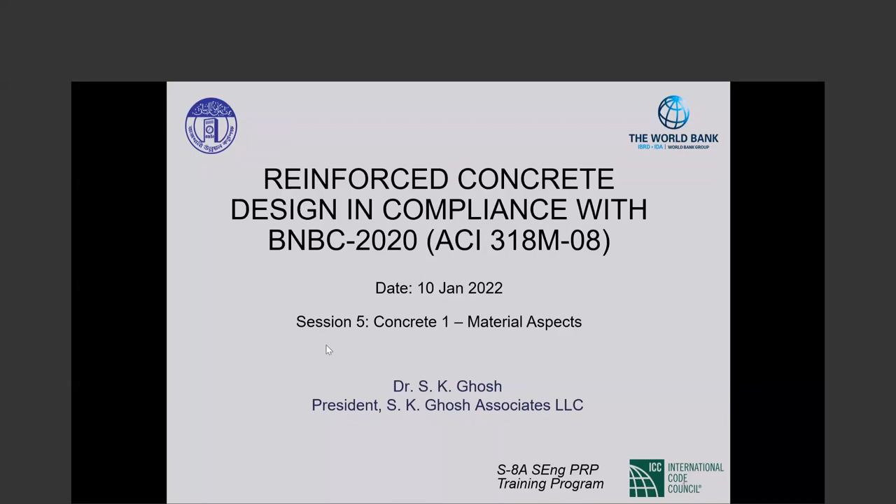Good evening once again. It's 8:05, so let us start. Bodhi has already provided a bit of an introduction, so I'll go forward. He pointed out that the date is 11th of January, not 10th. We had to make some adjustments at the beginning of the program because of circumstances beyond our control. Today is the sixth offering in the series, and we are starting with our reinforced concrete courses. Today is a two-part course. I'll talk about the material aspects of concrete and then go on to strength design, the principles of strength design, what it is that we do when we do strength design of concrete.

The ingredients of concrete, as you all know, are cement, sand, stone, and water. Those are the basic ingredients. But for a long time now, we also have admixtures in concrete. Admixtures used to be classified as mineral admixtures and chemical admixtures. Mineral admixtures will be something like blast furnace slag or fly ash. Those are now called supplemental cementitious materials, and the chemical admixtures are called admixtures. Cement plus the supplemental cementitious materials are called just cementitious materials. So what used to be water to cement ratio today is water to cementitious materials ratio. However, the code we are talking about, BNBC 2020, as pointed out earlier, is based on ACI 318-08.

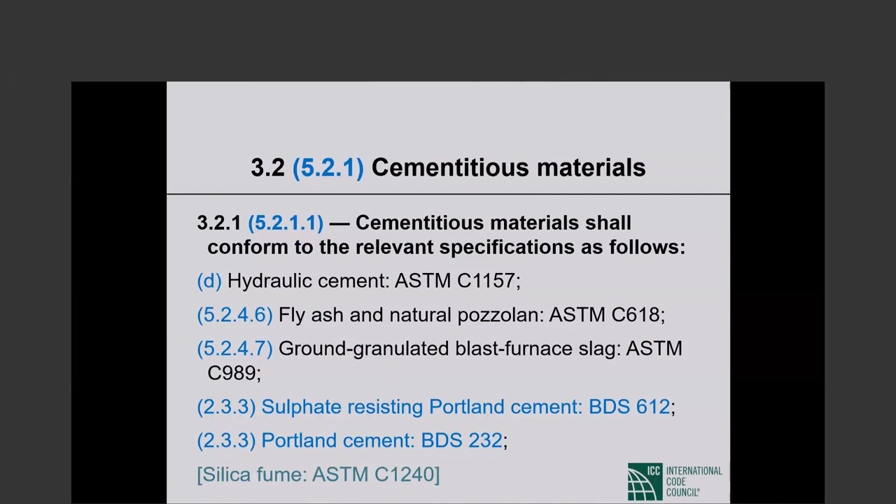To go back for a second, as I said, basically all cement sold is BDS 197-1, but it is tested for compliance with ASTM C150. When tested, BDS 197-1 cement is found to comply with ASTM C150. That's pretty much the situation as I understand it. So: Portland cement, then blended hydraulic cement C595, hydraulic cement C1157, and the mineral admixtures, among which fly ash, natural pozzolans, and ground granulated blast furnace slag. This is what we are dealing with for concrete making.

The BDS 197 cement comes theoretically at least in 5 varieties. CEM 1 is Portland cement, CEM 2 is Portland composite cement, CEM 3 blast furnace cement, CEM 4 pozzolanic cement, and CEM 5 composite cement, meaning cement and pozzolan together. Now, Dr. Akif tells me that pretty much all cement used is CEM 1 and CEM 2. CEM 3 has been used in nuclear power plants, and CEM 4 and 5 are basically not used.

C150 Portland cement is the American standard followed throughout the United States and in some parts of the world. C150 cement comes in 5 types: type 1, type 2, type 3, type 4, type 5. Type 1 is normal, type 2 is moderate sulfate resistant, very important - if there is sulfate in the soil, you may want to go for type 2 cement. Type 3 is high early strength - I think the name tells you what it is.

Type 4 is low heat of hydration. As cement reacts chemically with water, there is heat generated, and that may cause problems depending upon what you are doing, how you are curing the concrete, and so forth. So in many applications like mass concrete, low heat of hydration may be an attraction. And then type 5 is high sulfate resistance - when type 2 Portland cement won't do, you need type 5, cement with high sulfate resistance.

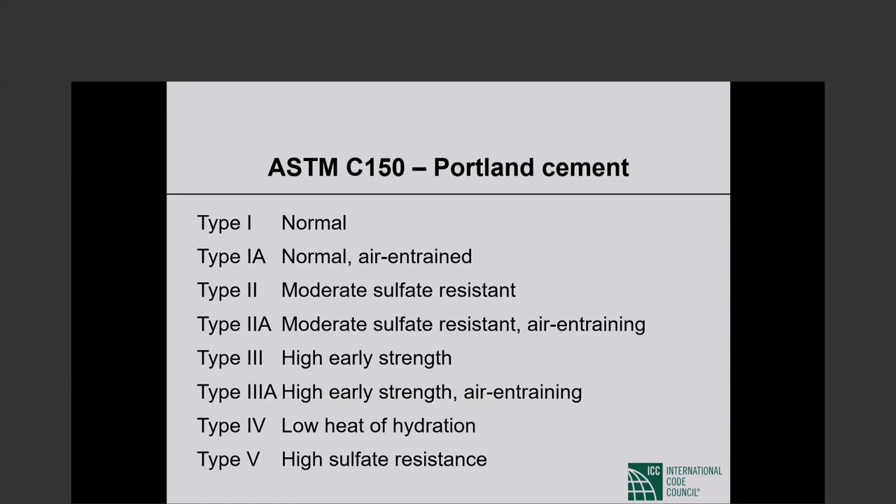And then for types 1, 2, and 3, there is air entrained cement. Entrainment of air in the cement is for freeze-thaw resistance. You do not have that problem in Bangladesh, but in much of the US, the entire northern part, concrete freezes and then thaws and then freezes again. That causes a lot of damage. To alleviate that damage, air is intentionally entrained in concrete, typically by adding air entraining admixtures to the concrete mix, but sometimes air is entrained in the cement itself at the cement plant, giving us type 1A, type 2A, and type 3A Portland cements. You don't have to worry about air entrainment to the best of my knowledge.

The blended cements C595: that is type 1S, which is Portland blast furnace slag cement, and 1P, Portland pozzolan cement. If you have 1S parenthesis 50, that means the blended cement contains 50% slag by mass. And if it is a 1P cement, then within parentheses you may have A for air entraining, MS for moderate sulfate resistant, and so forth. So C595 blended cement is type 1S or 1P with additional information conveyed through the labeling.

1157 hydraulic cements, this is relatively new. C150 goes back a long way, then came 595, and then 1157 is relatively recent.

This is also called performance spec, meaning the ingredients and so forth are not pinned down, but what properties the cement will deliver is emphasized. So hydraulic cement C1157 can be type GU, general use, HE, high early strength, MS, moderate sulfate resistant, HS, high sulfate resistant, MH, moderate heat of hydration, LH, low heat of hydration. So this kind of mirrors the varieties of C150 Portland cement that we have.

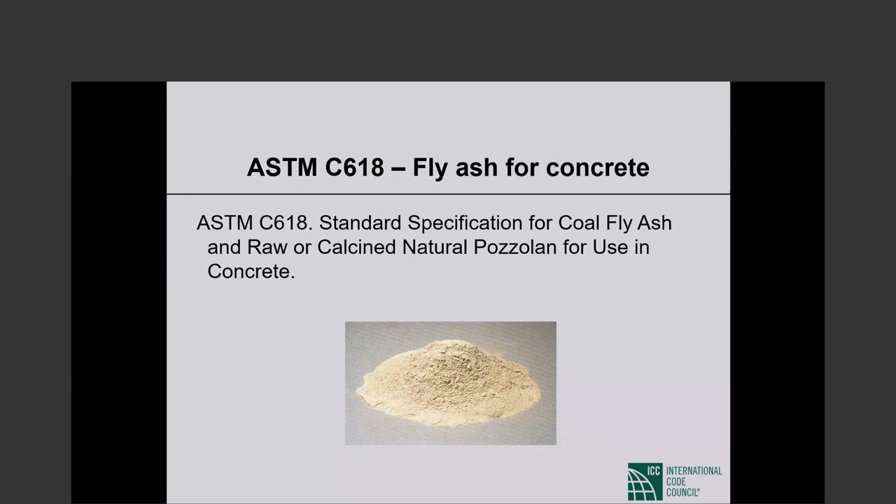The ASTM spec—so the fly ash that you use must comply with ASTM C618. That is the ASTM spec for coal fly ash and raw or calcined natural pozzolan for use in concrete. So C618 for fly ash.

Ground granulated blast furnace slag, that again is a pretty popular mineral admixture or supplemental cementitious material. The applicable ASTM standard is C989, standard specification for slag cement for use in concrete and mortars.

Now, this is not citing a standard, and this is a requirement in all the slides. The section numbers in black are ACI 318-08 section numbers. The section numbers in blue are BNBC 2020 section numbers.

Both documents tell you cementitious materials used in the work, meaning the project, shall correspond to those used as the basis for selecting concrete mixture proportions. So you proportion your mix assuming that you are going to use certain supplemental cementitious materials. On the project, you have to use exactly those materials, not something close to those. I think this is understandable upon reading, but this is very, very important.

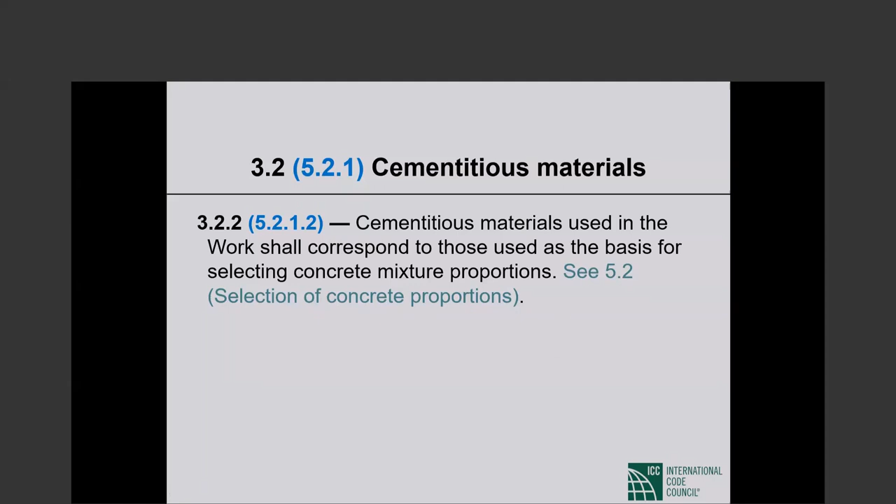Whenever we have on the slide text in this color, that means it is ACI 318 text that does not appear in BNBC 2020.

We go from cement to aggregate. Concrete aggregate shall conform to one of the following specifications. BNBC 2020 says coarse and fine aggregate shall comply with BDS 243—coarse and fine aggregate from natural source for concrete, BDS 243.

The US specification for normal weight aggregate is C33, and for lightweight aggregate it is C330. So C33 is normal weight aggregate, C330 is lightweight.

BNBC has an exception that reads: aggregates that have been shown by special test or actual service to produce concrete of adequate strength and durability, and approved by the building official, do not have to comply with ASTM C330. In other words, you may use lightweight aggregate that is not in compliance with C330 if, as the exception says, it has been shown by special test or actual service to produce concrete of adequate strength and durability, and it has been approved by the building official.

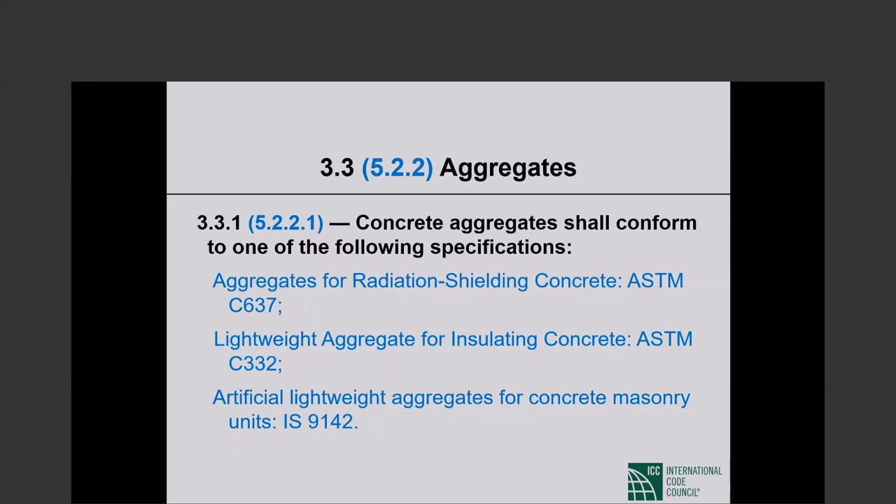This is not an ASTM. So those are cited by BNBC 2020, but not ACI 318. I realize that this is not exciting stuff, but these things are important. All the ingredients of concrete have to comply with applicable standards and specifications.

The next slide also has something extremely important: nominal maximum size of coarse aggregate shall not be larger than... Nominal maximum size—nominal means it is not the measured number, it is what it is claimed to be. So nominal 3/4 inch aggregate may be smaller when you actually measure it in size.

A nominal maximum size of coarse aggregate shall not be larger than 1/5 the narrowest dimension between sides of forms, 1/3 the depth of slab, and 3/4 the minimum clear spacing between individual reinforcing bars or wires, bundles of bars, individual tendons, bundle tendons, or ducts. Tendon would be pre-stressing steel strand, things of that kind.

The whole purpose of this is that concrete can be placed so that there will not be voids in the completed structural member. This is extremely important. If your stone pieces are too big, then voids may very well be created in the concrete because the concrete does not flow—it does not fill all the gaps that need to be filled. So 1/5 the narrowest dimension, etc. You can read this. This is extremely important. You cannot always use large aggregate, obviously.

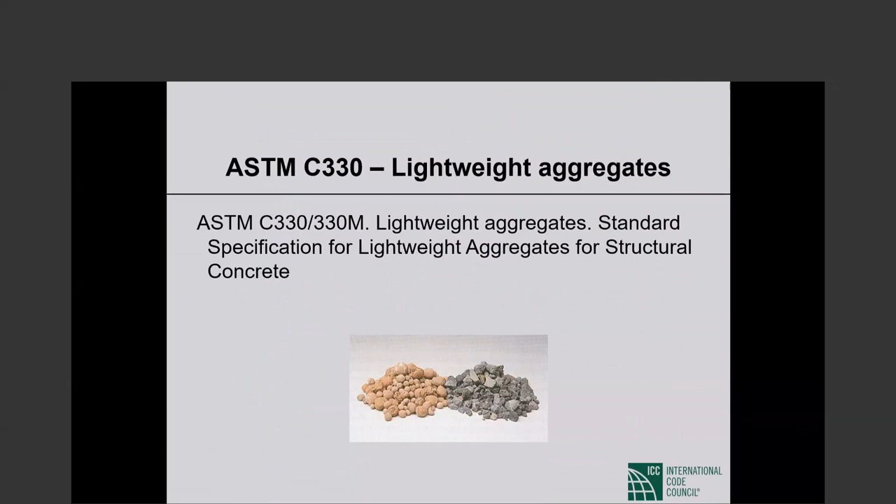C330 is the standard or specification for lightweight aggregate. The title is Standard Specification for Lightweight Aggregates for Structural Concrete.

Mixing water for concrete is more important than anyone would think. I would say extremely important that the water used in mixing concrete be non-problematic water. We now have an ASTM C1602, which is relatively new. I haven't checked, but I suspect when ACI 318-08 came out, that specification was simply not available.

So that is not cited in BNBC 2020. BNBC 2020 says mixing water for pre-stressed concrete, or for concrete that will contain aluminum embedments, includes that portion of mixing water contributed in the form of free moisture on aggregates.

So free moisture on aggregates shall count as mixing water. That is important. Mixing water shall not contain deleterious amounts of chloride ion, and how much is deleterious is given in both BNBC and ACI 318-08. For that, you have to go to section 553. So mixing water for pre-stressed concrete shall not contain deleterious amounts of chloride ion - this is the important part.

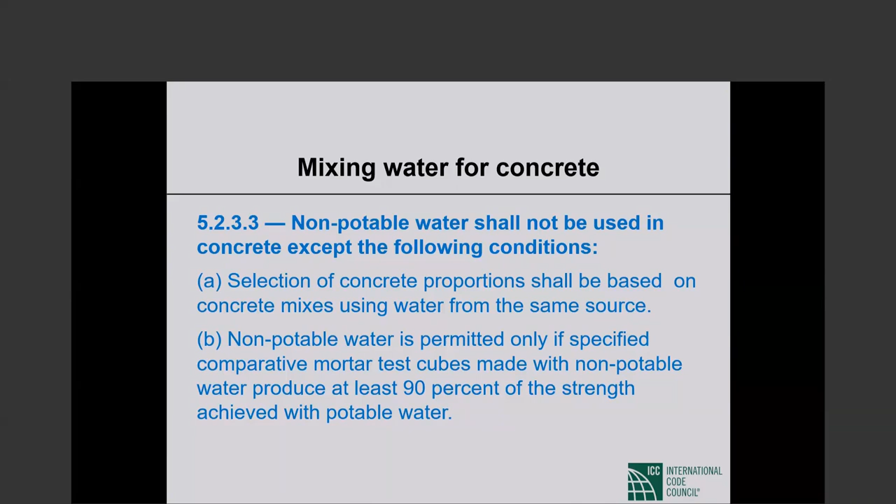Now, what is on this slide I would emphasize is extremely important, and item A is also important: selection of concrete proportion shall be based on concrete mixes using water from the same source.

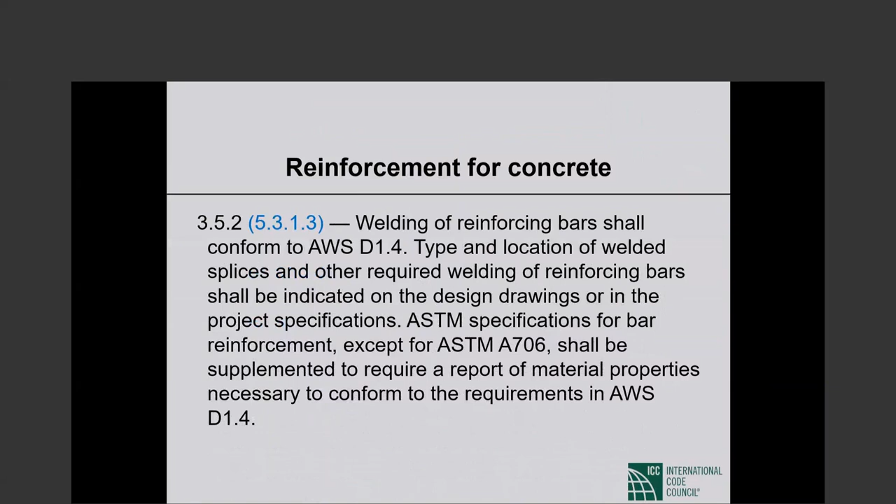Now we go on to reinforcement for concrete. The first item is not reinforcement itself, but welding of reinforcement. Welding of reinforcing bars shall conform to AWS, American Welding Society, D1.4. I think the rest of it I will let you read - it gets a little too much.

Anyway, deformed reinforcement - that's what we always basically use. There used to be plain reinforcement a long time ago, but that has now been discontinued for quite a while. So all reinforcement is deformed reinforcement. The deformations are those ribs that you see on reinforcing bars. It is also called ribbed bars, the deformed bars.

So deformed reinforcing bars shall conform to the requirements for deformed bars in one of the following specifications. The specifications in Bangladesh are BDS 6935-1 and BDS 6935-2. -1 is plain bars, so those are not used. -2 are deformed bars, those are the ones used. So just as I remarked about cement, about reinforcement, basically all reinforcement used in Bangladesh, I understand, is BDS 6935-2.

Now in the US, the vast majority of reinforcement is ASTM A615, but particularly in seismic applications, and I would say increasingly, we have A706 reinforcement. The difference between the two: A706 is weldable reinforcement, A615 is not. A615 reinforcement requires special treatment if we are going to weld it. The ingredients of A706 are also tied down much more strictly than those of ASTM A615. So ASTM A615 is standard billet steel, and A706 is weldable reinforcement.

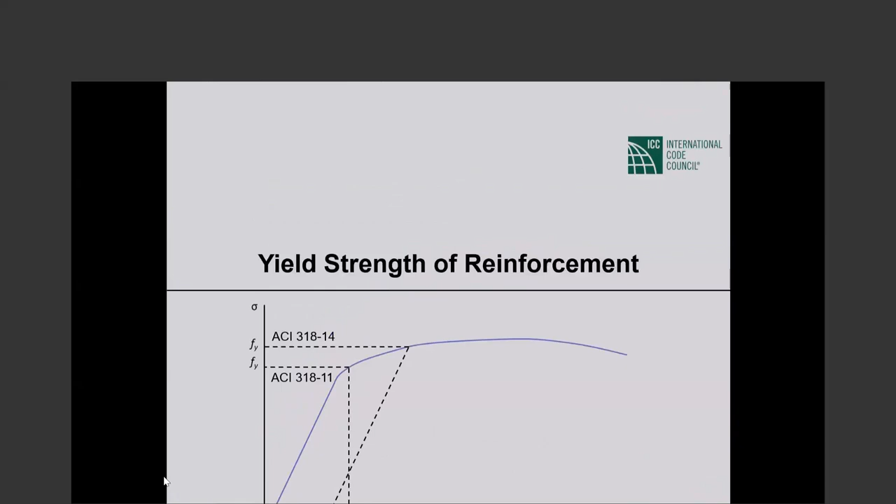So when the yield strength exceeds 60 ksi, the yield strength shall be taken as the stress corresponding to a strain of 0.35%. This change of definition of yield strength becomes important in certain applications, and it may come up in later discussions, but that is not the subject today. However, I do want to point out that this change of definition is made. Yield strength means different things for reinforcing steel up to 60 ksi yield strength and reinforcing steel with yield strength larger than 60 ksi.

Then, in addition to bars, there are bar mats for concrete reinforcement. The applicable ASTM standard is A184. When I have M following the standard number, that simply means metric. Reinforcing bars used in bar mats shall conform to 615 or 706, those are the two US specs for reinforcement.

Now we go from bar to wire for reinforcement. So deformed wire for concrete reinforcement shall conform to A496. BNBC says shall not be smaller than size D4. I will talk about wire size on the next slide. Shall not be smaller than size D4, which has a nominal diameter of 5.72 millimeter.

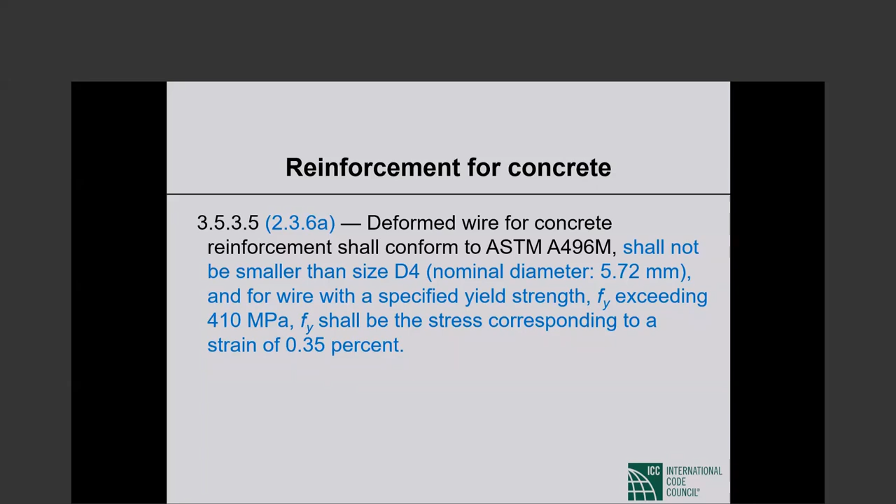Now, wire size, when we say D4, what does it mean? Individual wire size designations are based on the cross-sectional area of a given wire. M stands for metric, W represents plain wire, and D represents deformed wire. The number following the W and the D represents the cross-sectional area of the wire in millimeters square. So D4 means deformed wire having a cross-sectional area of 4 square millimeters. A D10 wire would indicate a deformed wire having a cross-sectional area of 10 square millimeters. So keep that in mind when you come across wire sizes.

Then there is what used to be called welded wire fabric. Now it is called welded wire reinforcement. People who manufacture these do not like the term fabric. Now it is welded wire reinforcement.

So welded wire reinforcement may be made of plain wire or deformed wire. Welded plain wire reinforcement shall conform to ASTM A185, except that for wire with high strength exceeding 60 ksi yield strength, the definition of yield strength changes. Welded intersections shall not be spaced further apart than 300 millimeters, 12 inches, in direction of calculated stress, except for welded wire reinforcement used as stirrups. So there is a maximum spacing between the cross wires, no more than 12 inches.

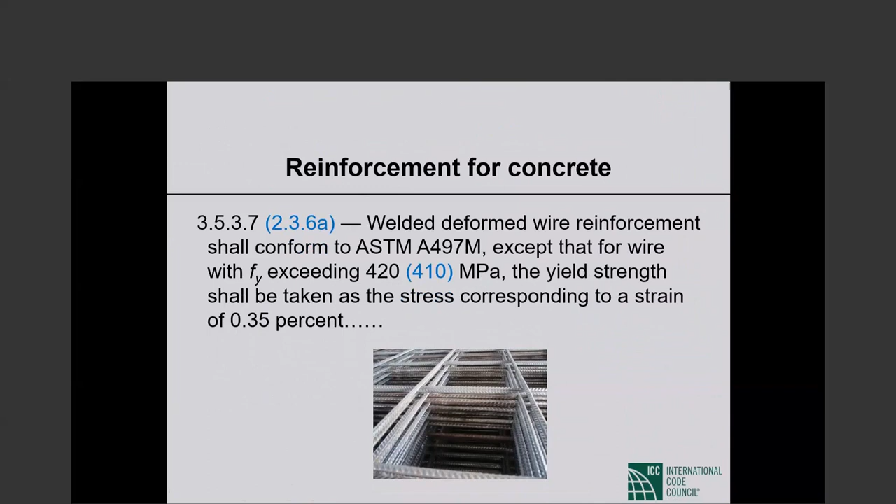Welded deformed wire reinforcement, the spec is A497. Again, the definition of yield strength changes when yield strength exceeds 60 ksi.

Welded intersections shall not be spaced further apart than 400 millimeters. For plain wire reinforcement, the cross wires cannot be further apart than 300 millimeters. For deformed wire, it is 400 millimeters.

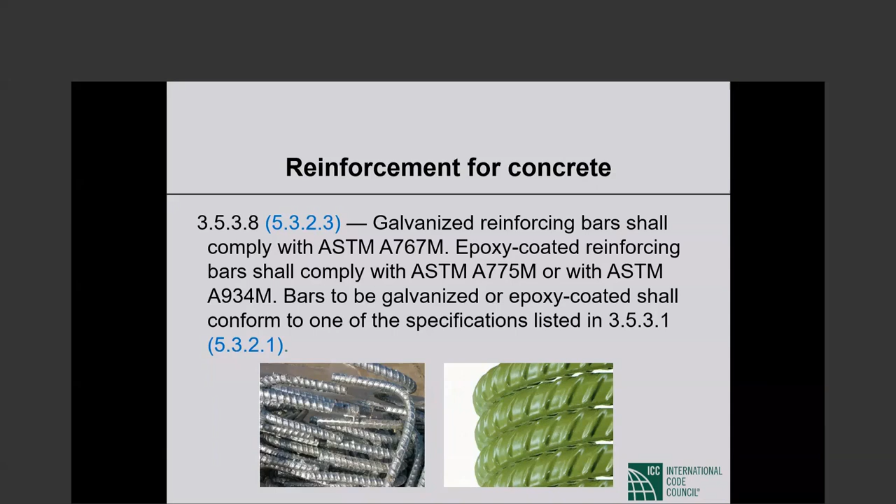Then there is galvanized reinforcing bars, 767. Galvanized means zinc coated, that is protection against corrosion, or epoxy coated reinforcement, A775. Epoxy coated, as I said, is very popular in highway construction for pavements, and in Bangladesh apparently in coastal areas for basements and things, because of the high risk of corrosion.

This language is in ACI 318-08, not in BNBC 2020. I think I'm going to skip it because of that. Okay, but if you have an interest, please read it.

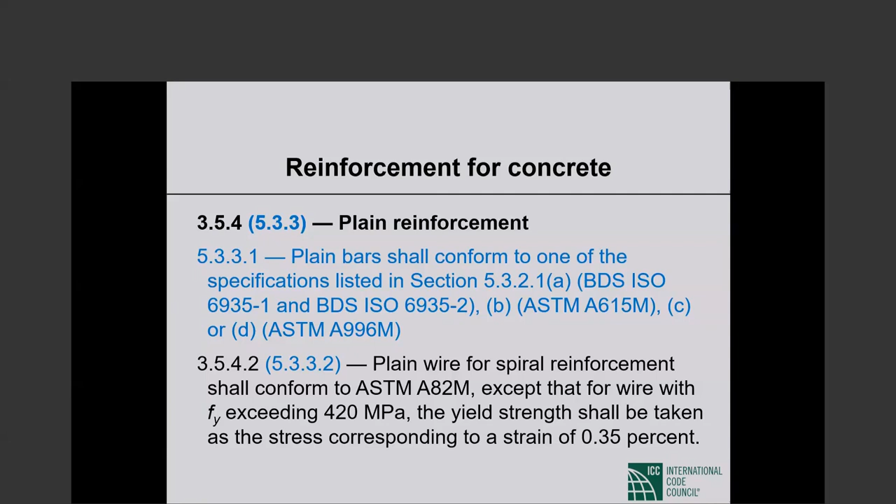Okay, so we come back to reinforcement for concrete, plain reinforcement. You know that it is 6935-1. Plain bars shall conform to 6935-1 as mentioned previously. Plain wire for spiral reinforcement shall conform to ASTM A82, except that for wire with F sub y exceeding... that definition of yield strength change repeats itself.

This is something I will mention because I consider it to be extremely important. At some point, I don't remember which module now, we will talk about flat plate design. Flat plate is a reinforced concrete slab supported directly on columns. There are no column line beams. Also, there is no local thickening of the slab on top of the columns.

Those thickenings are called drop panels. Further, there are no column capitals. The column tops are not flared to give us a larger column area at the top. So it is a slab supported directly on columns without any drop panels or column capitals. In the design of that type of slab, the critical thing is punching shear, two-way shear as opposed to one-way shear, commonly referred to as punching shear.

When punching shear stress is beyond the punching shear stress carrying capacity of the concrete, we use punching shear reinforcement. And the most popular kind are now headed studs.

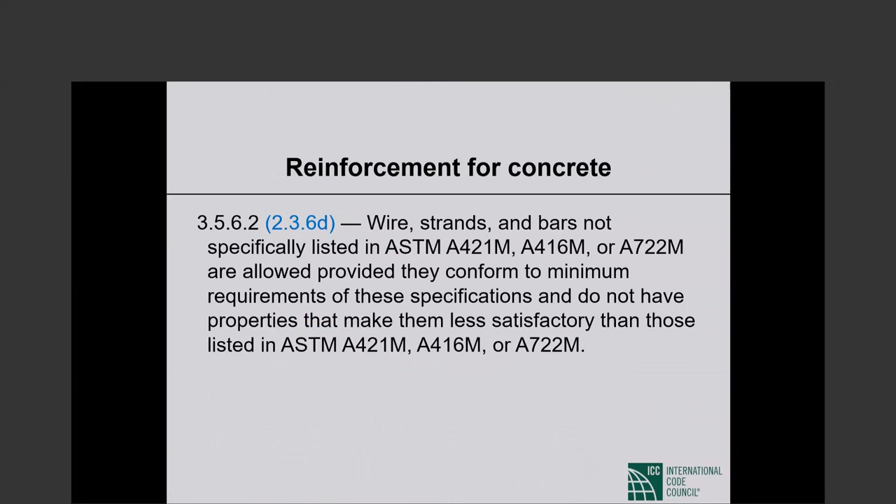Okay, then beyond reinforcing steel and pre-stressing steel, there are times when we use structural steel in concrete, steel pipes, or tubing, and there are specifications given. I don't think I need to or want to take time over those. Those are not common applications, but there are times when you do use structural steel pipe and tubing in concrete. If you do, there are ASTM specs governing their use.

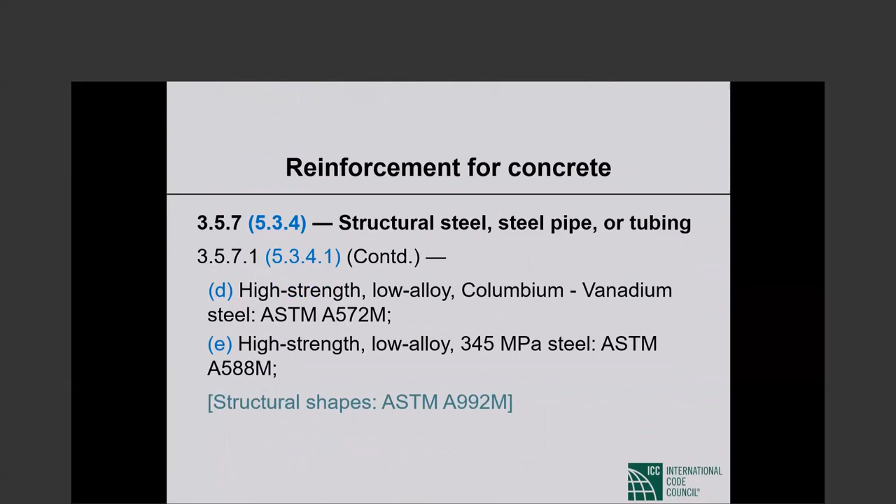Steel discontinuous fiber reinforcement for concrete is recognized in ACI 318 as shear reinforcement under very tight controls. This is an increasingly important item, in my opinion, that you should be aware of - steel discontinuous fiber reinforcement.

Other types of fibers, like carbon fibers, are not recognized by 318. And then there are headed deformed bars.

Normally, to anchor a bar, we hook the bar into the concrete. But if there is a lot of reinforcement, the hooks lead to major congestion. So instead of using hooks...

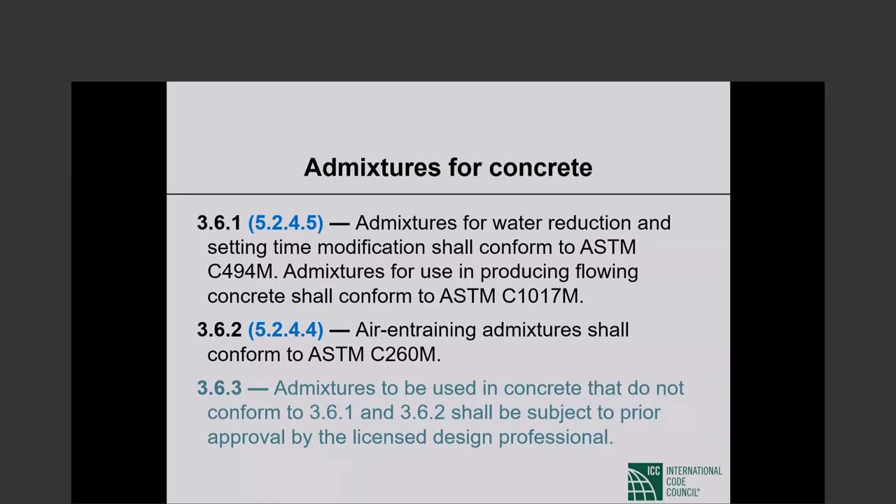Admixtures to be used in concrete shall be subject to prior approval. ACI doesn't require this, but BNBC does - admixtures to be used in concrete shall be subject to prior approval by the licensed design professional and conform to the following standards.

So BDS EN 934-1 or BDS EN 934-2.

Fly ash or other pozzolans - that will not be called admixture today, it's mineral admixture now, supplemental cementitious material. You have already seen the spec is C618. Ground granulated blast furnace slag is also cementitious material.

ASTM C989 - pigment for colored concrete, C979. BNBC cites those under admixtures for concrete.

Calcium chloride or admixtures containing chloride from sources other than impurities in admixture ingredients shall not be used in pre-stressed concrete, in concrete containing embedded aluminum, or in concrete cast against stay-in-place galvanized steel forms.

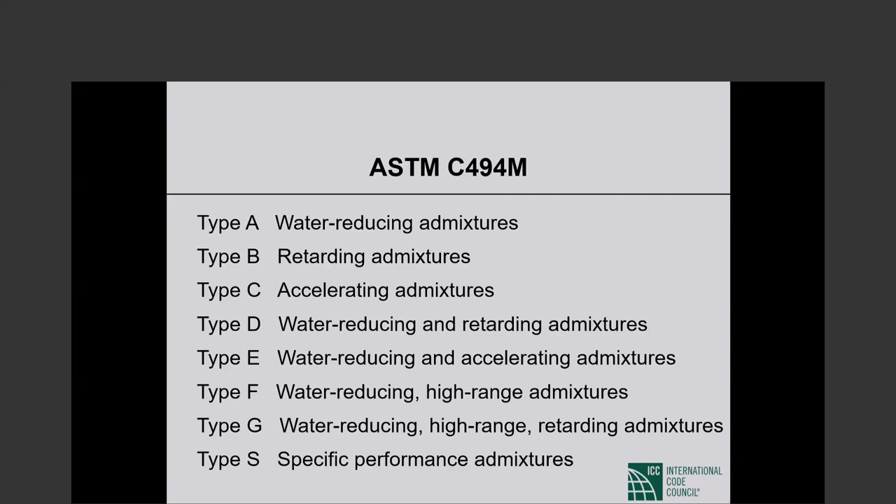High range means it gets close to what was it called, the self-consolidating - there was a flowing, so it gives you kind of flowing concrete. So water reducing high range admixtures, water reducing high range retarding admixtures, and then specific performance admixtures - A, B, C, D, E, F, G, and S, various types of C494 admixtures used.

BNBC cites BDS EN 934-1. Those are admixtures for concrete, mortar, and grout - Part 1 is common requirements. 934-2, admixtures for concrete, mortar, and grout, Part 2 talks about concrete admixture definitions, requirements, conformity, marking, and labeling.

Storage of materials: cementitious materials and aggregates shall be stored in such a manner as to prevent deterioration or intrusion of foreign matter. Storage is extremely important - prevent deterioration and intrusion of foreign matter. These things, when you read them, don't read like much, but these are very, very important requirements.

Durability requirements - again, extremely important. Durability is like longevity in people. How long is your concrete going to last? How long is your concrete going to be serviceable, going to provide you, going to serve the purpose for which the concrete was installed?

So for concrete intended to have low permeability, so-called watertight concrete - for concrete intended to have low permeability when exposed to water, the water cement ratio shall not exceed 0.5.

When we talk about durability, the various aspects of it are typically four: freeze-thaw resistance, which is kind of moot in Bangladesh, so you have three considerations - one is resistance to sulfate attack, second is water tightness or permeability, however you want to describe it, and the third is corrosion protection. So: sulfate resistance, corrosion protection, and permeability or lack of it, impermeability.

Those are the three considerations. BNBC starts with watertight concrete, intended to have low permeability when exposed to water. What you need to do is keep the water-cement ratio—today it would be called water-cementitious materials ratio, and I think that's the way you should practice it because that makes more sense—shall not exceed 0.5. That is a pretty generous number, not a very tight restriction.

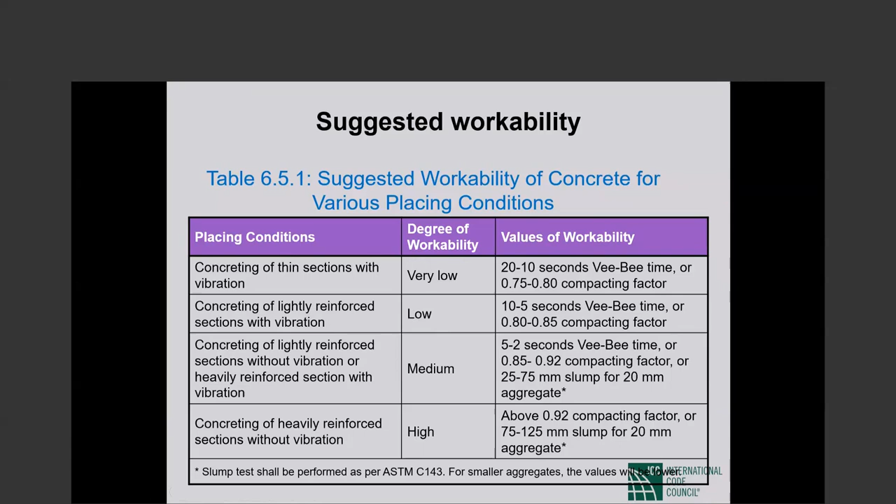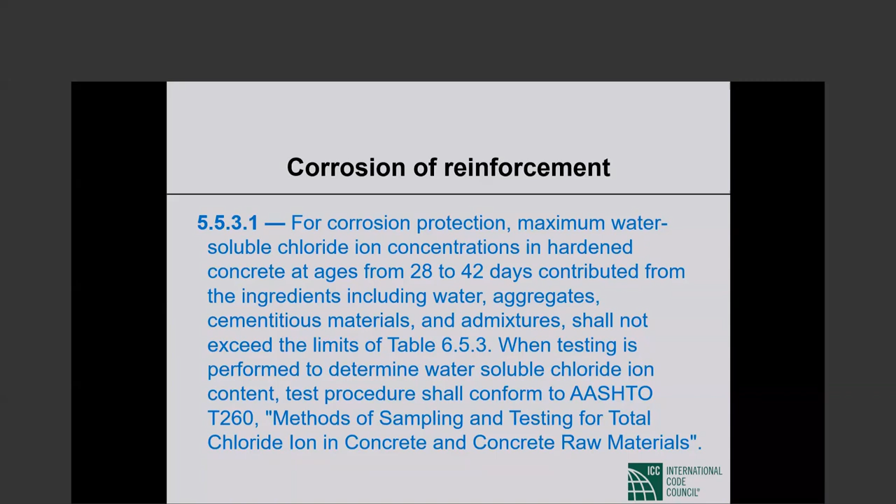When testing is performed to determine water-soluble chloride ion content, the test procedure shall conform to AASHTO T260, which I had in mind when I was talking a minute ago. When reinforced concrete will be exposed to brackish water, seawater, or spray from these sources, the requirements of sections 5511 and 5512—those are the first two things I showed you for water-cement ratio or concrete strength—apply. There is a limitation on water-cement ratio that we went over; you can go back, I'm not going to spend the time.

There is also a minimum cover requirement in section 818, chapter 8, which we will come to. So both are required: the limitation on water-cement ratio and adequate cover on reinforcement. The maximum chloride ion content, as I said, is given in a table—this gives you the maximum chloride ion content depending upon your application.

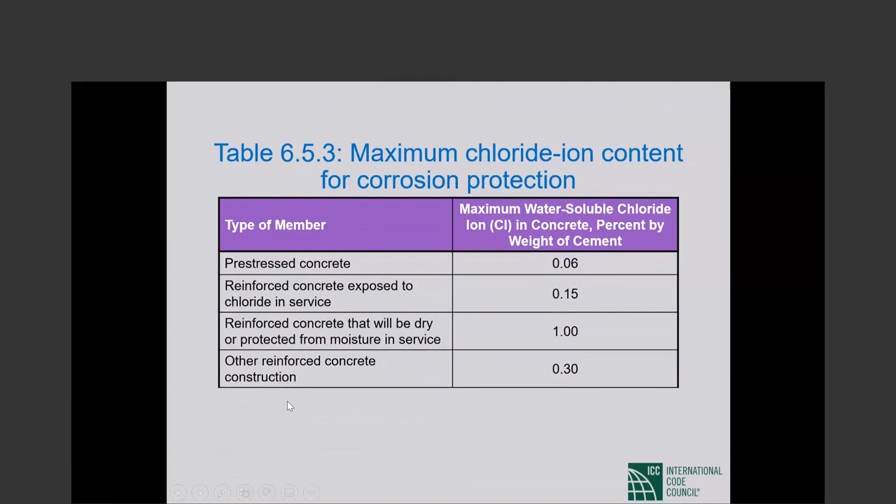The minimum concrete strength that I mentioned, minimum concrete strength for structural use of reinforced concrete, this is not particularly for corrosion protection, this is across the board. Minimum concrete strength for structural use of reinforced concrete in BNBC is 20 megapascal, Newton per square millimeter. 20 is about 3000 psi. However, for buildings up to 4-story, the minimum concrete strength may be relaxed to 17 megapascal, which would be about 2500 psi or so. Okay, so those are very minimum concrete strengths.

In IBC, it is 2500 psi across the board. We don't go up to the 3000 except in some cases.

Corrosive environments. Okay, this is important stuff for Bangladesh, this is why I kept it here. The cover that was being referenced from earlier - if a thickness of cover for corrosive environment or other severe exposure conditions greater than the concrete cover specified in section such and such is required, such greater thickness shall be specified. So there are standard cover requirements in 8171 to 8176. But if thickness of cover for corrosive environments or other severe exposure conditions greater than that is required, then such greater thickness shall be specified.

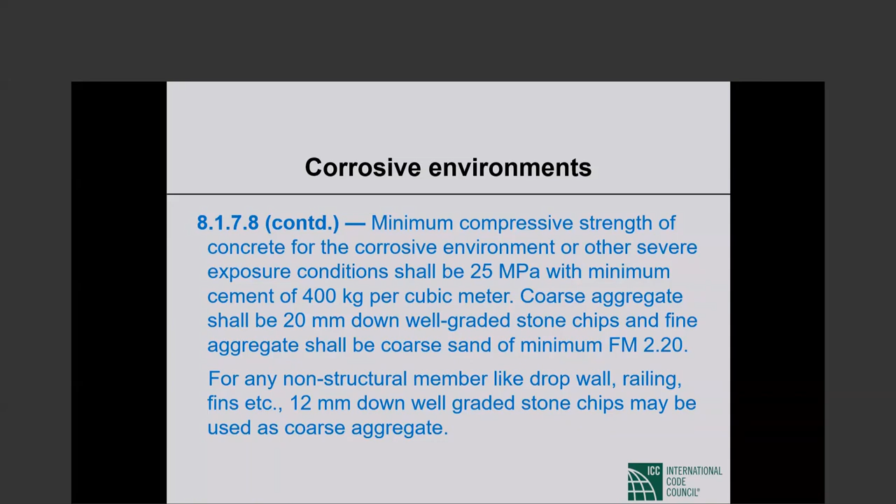Coarse aggregate shall be 20 millimeter down. I will let you read the rest of it because all the details will not register, but it is extremely important that you have these requirements on the books, and following them is in your interest. Use of brick chips as coarse aggregate is strictly prohibited for corrosive environment or other severe exposure conditions. Water cement ratio shall be 0.4 to 0.45. Potable water, drinkable water shall be used for all concreting. That exception goes away in corrosive environments.

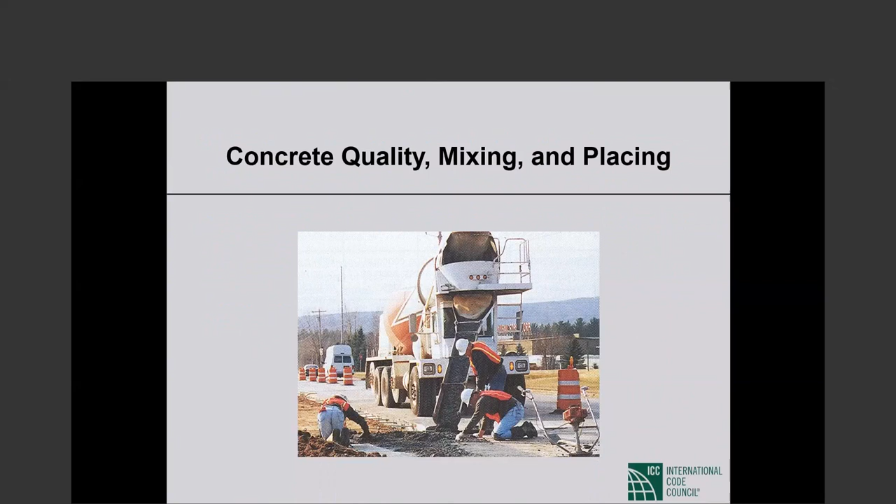Okay, concrete quality, mixing and placing. I think I'm beginning to run late, so some of this stuff probably - anyway, concrete shall be proportioned to provide an average compressive strength. So if specified compressive strength is 20 MPa, whatever, you have to set a required strength that is higher than that, and that would be F sub C R prime, R for required.

Concrete shall be produced to minimize the frequency of strength tests below F sub C prime. F sub C prime is the specified value. So you will set a target value for proportioning that is higher, F sub C R prime. And the idea is that concrete shall be produced to minimize the frequency of strength tests below F sub C prime. For concrete designed and constructed in accordance with the code, F sub C prime shall not be less than 17 MPa, which we have seen before.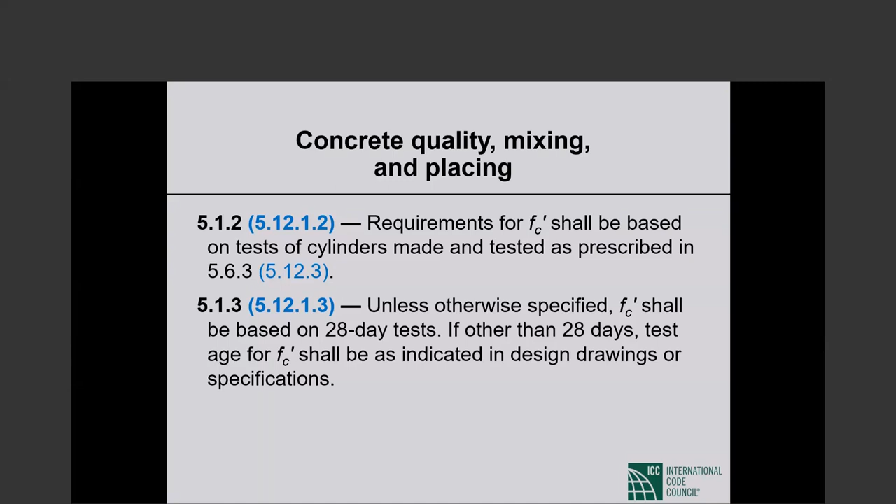The requirements for F sub C prime shall be based on tests of cylinders made and tested as prescribed. So there is a section that tells you about the cylinder size and so forth. Unless otherwise specified, F sub C prime shall be based on 28-day tests. If other than 28 days, test age for F sub C prime shall be as indicated in design drawings or specifications. That is a choice that the engineer has. But if you want strength at 42 days rather than 28 days, that has to be on your drawings or specs.

So the only thing that is in BNBC carried over from 318 is splitting tensile strength tests shall not be used as the basis for field acceptance of concrete. It has to be compressive strength, not the split tensile strength.

Proportions of materials for concrete shall be established to provide workability and consistency to permit concrete to be worked readily into forms and around reinforcement under conditions of placement without segregation and bleeding. It must also meet requirements for applicable exposure categories of chapter 4 - those are the durability requirements.

So you have to comply with strength requirement, you have to comply with durability requirement, but you also have to think of workability - the concrete has to be able to go where it needs to go. That is extremely important. Workability, durability considerations, and strength - all three are important in proportioning.

Where different materials are to be used for different portions of proposed work, each combination shall be evaluated. Concrete proportions shall be established. You can proportion concrete on the basis of field experience or trial mixtures or both, or you can proportion concrete without field experience or trial mixtures, and it shall meet the applicable requirements.

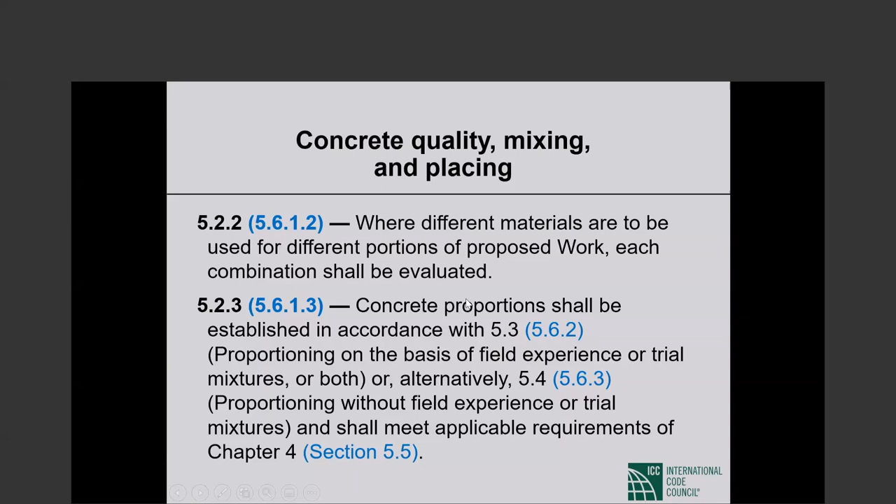All of this stuff has now been deleted from ACI 318, but it used to be in older editions, and it's still in BNBC 2020. We deleted it from 318 because the engineer does not typically deal with proportioning - that is done at the ready-mix concrete plant. So we have stripped ACI 318 of all this stuff.

Proportioning on the basis of field experience and/or trial mixtures, or proportioning by water cement ratio when you don't have field experience or trial mixtures. If you proportion by water cement ratio, then there is a strength reduction that is specified. All those details are in BNBC 2020.

Evaluation and acceptance - here we talk about testing, frequency of testing, lab cure specimens, field cure specimens, and investigation of low strength test results.

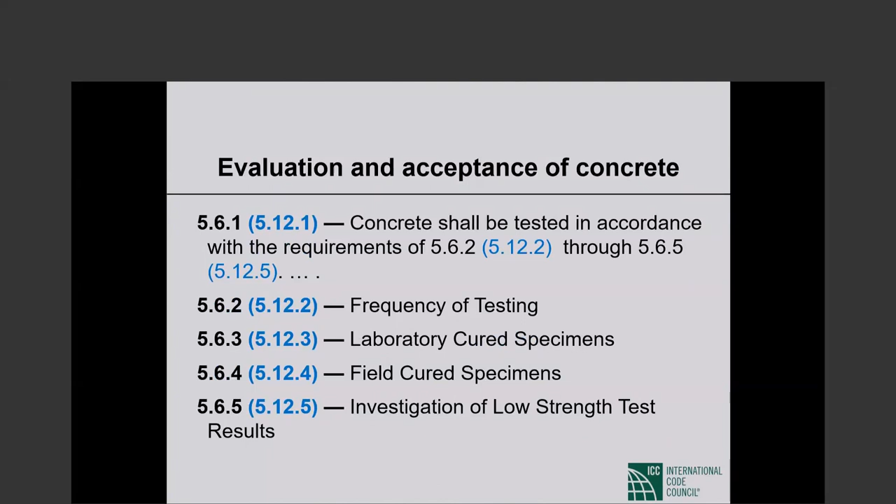And then there are major requirements concerning construction aspects, which again I will not talk about because there is time limitation. But everything about concrete - if you want the right product, if you want a properly constructed concrete structure - all of these items here are important.

The mixing of the concrete, not just the proportioning, the mixing, the conveying. Typically these days a truck mixer comes from the concrete plant, arrives at the job site. Then the conveying is typically through pumps in the United States. And then depositing - how do you put it in place from the head of the pump to where the concrete ultimately belongs?

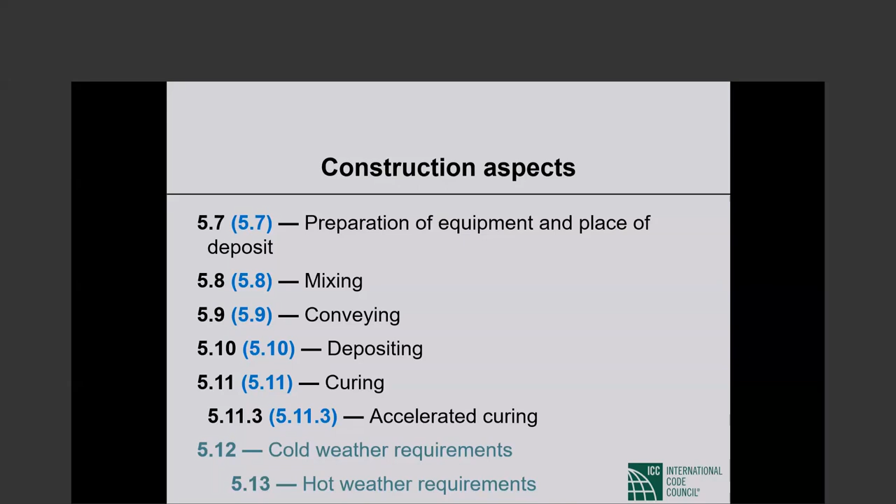After you have placed the concrete, curing is absolutely critical. There is nothing more important than curing of the concrete. You cannot let the concrete dry too quickly - that will lead to cracking and weaknesses. These are all major topics that I do not have time to discuss, but please make sure you understand them to be important, and follow not only the requirements in the code but also sound practice.

Shores are the posts and things that support the forms. Reshoring is when you remove the forms once concrete has gained sufficient strength, but at that point you still have to keep the slabs supported. So you remove the shores to remove the formwork, but then you reshore - you put the post back, supporting the slab directly. Embedments in concrete, construction joints.

Okay, so that brings me to... I probably don't have a very good sense of the time either segment should take, because I haven't done this before. So I have an hour and 10 minutes - it should be sufficient, I would think.

Okay, so this is now the strength design method. Two design philosophies have long been prevalent: allowable stress design and strength design. The strength design, as we call it today, was initially called ultimate strength design, and the word ultimate eventually dropped out. I don't remember from what point onwards we have called it just strength design.

So ASD, or allowable stress design, and strength design - two philosophies. Allowable stress design was the principal method used from the early 1900s until the early 1960s. Even somebody of my vintage has really not done ASD of concrete, only allowable stress design of other materials.

Steel was the next one to abandon allowable stress design. I won't be able to tell you the exact year, but it was like in the 80s in the United States. Masonry is in the process of switching now - masonry 5 years ago was mostly allowable stress design, some were switching to strength design. Today I think it is 80-85% strength design, the remaining ASD. Wood is the material where ASD is still common, and wood is a very important material here in the United States.

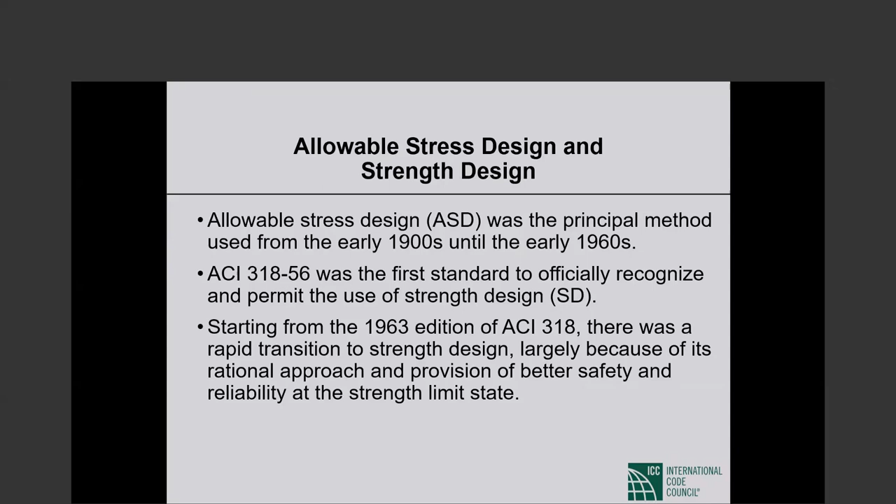1963 treated both ASD and strength design on an equal basis. In 1956, strength design was introduced in an appendix. By 1963, both ASD and strength design were in the main body of the code.

Large portions of ASD dealing with bond, shear, diagonal tension, combined axial load, and bending were modified to reflect behavior at nominal strength.

By 1963, and then there was 1971. It remained the same as 1963, but by 1977, the allowable stress design was moved to an appendix.

So strength design was introduced in an appendix in 1956. In 1963 and 1971, both remained side by side in the main body of the code. In 1977, ASD went to an appendix, and in 2002 it was gone. The appendix with ASD was deleted from 318.

That is the brief history. So from 2002 onwards, we simply do not have allowable stress design of concrete.

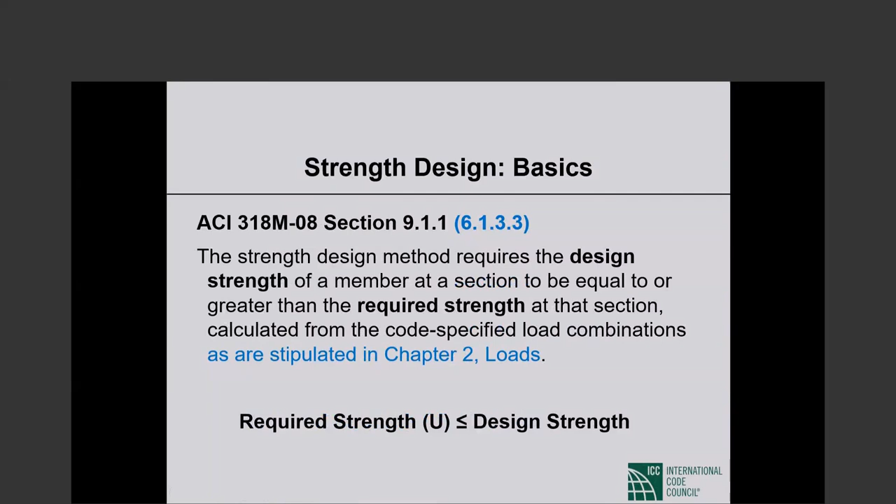What is required strength? There are service loads. Service loads are the loads specified by the building code which a structure is expected to support under normal usage. There are service loads and there are abnormal loads. So service loads, so many pounds per square foot of live load, that would be a service load.

We go from service load to service load effect. If you have a structure, there are dead loads already acting, the weights of the structural members, and then we have live loads acting on the slabs. Now we analyze the structure elastically, and that gives us bending moments, shear forces, axial forces in the various structural members. These are internal forces caused by the external loads.

Every word I'm saying is important, please listen very carefully. So the service loads are imposed on the structure. We analyze our structure elastically under the service loads. We calculate bending moments, shear forces, axial forces in our structural members. Those are internal forces caused by the external loads. Those are also called load effects.

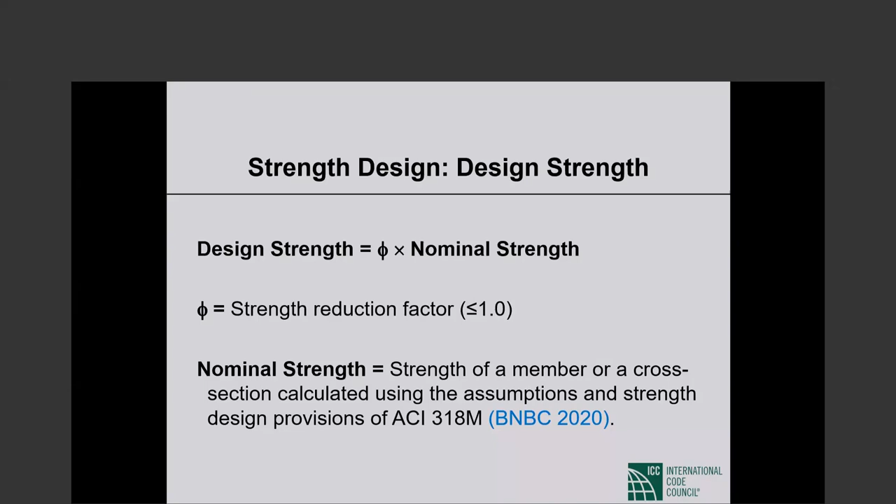That nominal strength is discounted by a strength reduction factor phi. The notation for nominal strength, if it is bending strength, is M sub n for nominal. Phi times M sub n would be design moment strength. So the design strength is a strength reduction factor times nominal strength.

Both nominal strengths and phi factors for reinforced concrete members are to be determined in accordance with BNBC 2020 or ACI 318M. The required strength is always sub U. This notation is extremely important, you have to stick with those. Required strength is very different from design strength. Required strength is the demand, design strength is the supply.

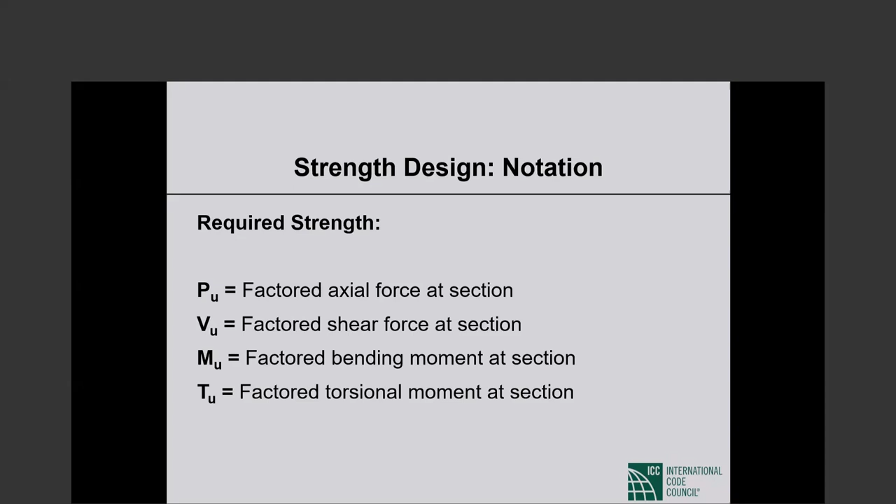The demand side is sub U: required factored axial force, required strength P sub U, required shear strength V sub U, required moment strength M sub U, required torsional strength T sub U. The supply is nominal strength times phi. The nominal strength is sub N: if it is axial load, P sub N; if it is shear, V sub N; if it's moment, M sub N, and so forth. Design strength is phi times P sub N, phi times V sub N, phi times M sub N.

Why do we apply load factors? Probable variation in specific service loads because of variation in member sizes, variation in material densities, structural and non-structural alterations, and degree of accuracy in load determination.

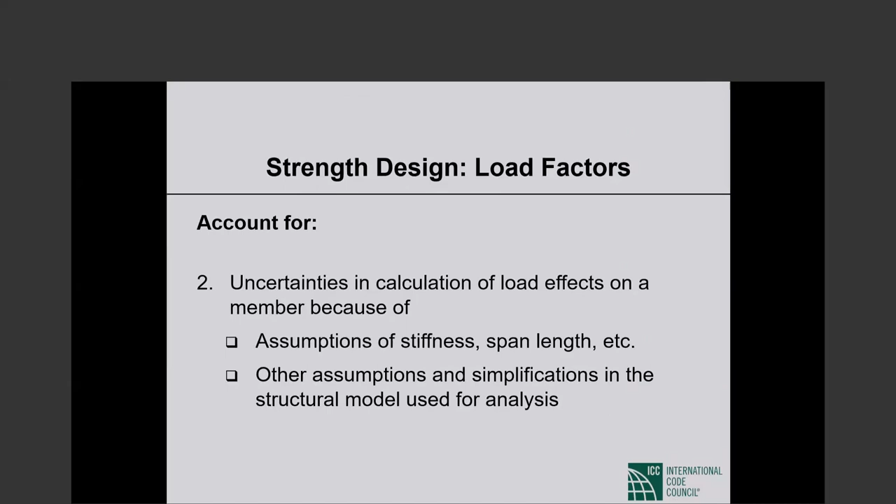Also, uncertainties in calculation of load effects on a member. We go from load to load effects by analysis. In that analysis, we have to make assumptions of stiffness, span length, etc., and other assumptions and simplifications in the structural model used for analysis. There are uncertainties involved in all of those. We assume a particular stiffness which may be different. This is why we need these load factors.

Strength reduction factors. Why do we discount the nominal strength? Probable variation in material strength because of quality control, effect of testing speed. I don't know how many of you realize this, but if you test something at a high speed, you will get higher strength than if you test the same thing under lower speed. There's also the difference between in situ, in-place strength, and specimen strength. We test cylinders, which are representative of in situ strength, but it is not exactly the same.

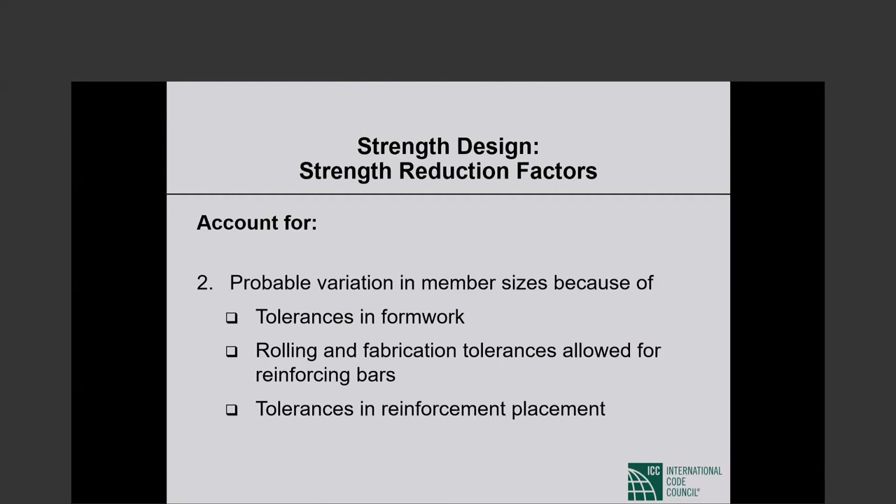Stresses due to creep and shrinkage. Probable variation in member sizes because of tolerances in formwork. Rolling and fabrication tolerances allowed for reinforcing bars. Tolerances in reinforcement placement.

Strength reduction factor also accounts for various design assumptions and simplifications that cause the design behavior of structural members to deviate from the actual behavior, and finally, consequences of failure. When a column fails, it is a catastrophe. When a beam fails, it may not be a big deal. Beams can be much more easily repaired than columns can be. So columns have to be assigned a significantly lower phi factor than beams. Consequences of failure.

So up to that point is the basic strength design that we have had since 1963. From 1956 to 1963, significant changes were made in strength design, but from 1963 onwards, details have changed, but we stayed with the same strength design basically. But then came unified design provisions in relatively recent times, ACI 318-95. A modified version of the strength design method was first introduced in ACI 318-95.

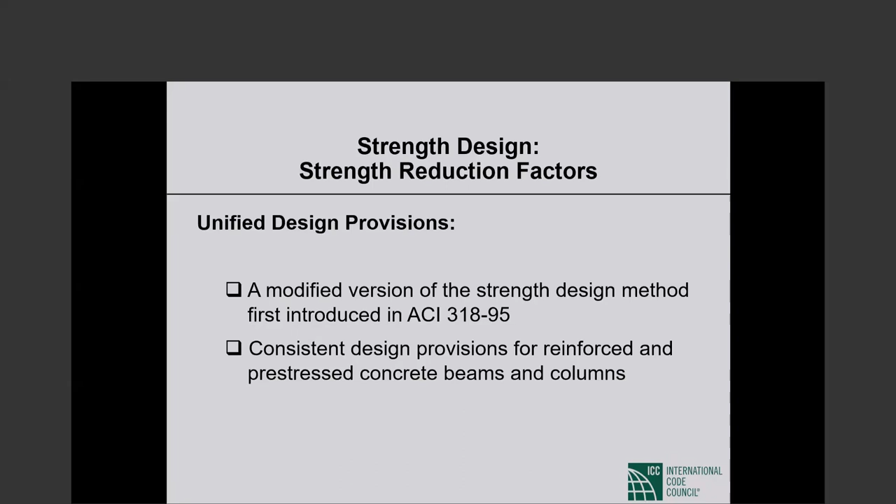But there is no fundamental difference between the members. Also, pre-stressed concrete and reinforced concrete should be viewed as two extremes of a continuum, which is partially pre-stressed concrete. You can combine reinforcing steel and pre-stressing steel in the same member, and depending upon how much of the load effect is resisted by the pre-stressing steel versus reinforcing steel, you can have behavior approaching that of a reinforced concrete member to behavior approaching that of a pre-stressed concrete member. So it should be a continuum. There should not be any fundamental difference in the way we treat reinforced concrete members versus pre-stressed concrete members. That was the idea behind unified design.

Okay, so under this unified design introduced in 318-95, the phi factor became a function of the so-called net tensile strain, a very important term now, epsilon sub t, net tensile strain. So phi is now a function of the net tensile strain epsilon sub t.

Net tensile strain is the tensile strain at nominal strength, exclusive of strains due to pre-stress, creep, shrinkage, etc. Okay, let me do it this way. Nominal strength.

Something very, very fundamental to ACI 318 from the beginning of strength design has been that a section attains its nominal strength when the extreme compression fiber concrete strain reaches a value of 0.003. I will repeat. Every bit of what I'm saying now is extremely important for you to understand.

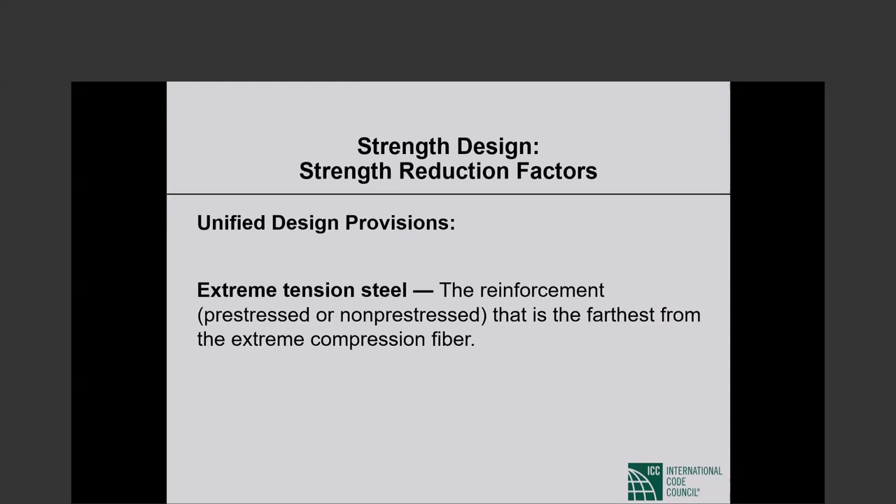Now, when I said strain in the reinforcing steel, it is actually strain in the extreme tension steel. What is extreme tension steel? The reinforcement that is the farthest from the extreme compression fiber. Very simple. So net tensile strain is the strain in the extreme tension steel corresponding to a strain of 0.003 in the extreme compression fiber of the concrete.

And the word 'net' again implies that we must not include in epsilon sub T any effect of pre-stress or creep or shrinkage or things like that. All of epsilon sub T shall have been caused by externally applied loads.

Why? So this unified design that is in ACI 318 was the contribution, let me say, of Bob Mast, Robert Mast, who was truly an outstanding engineer. He died relatively recently, he lived to his late 90s and was very sharp until the end. One of the smartest engineers that has been my privilege to know.

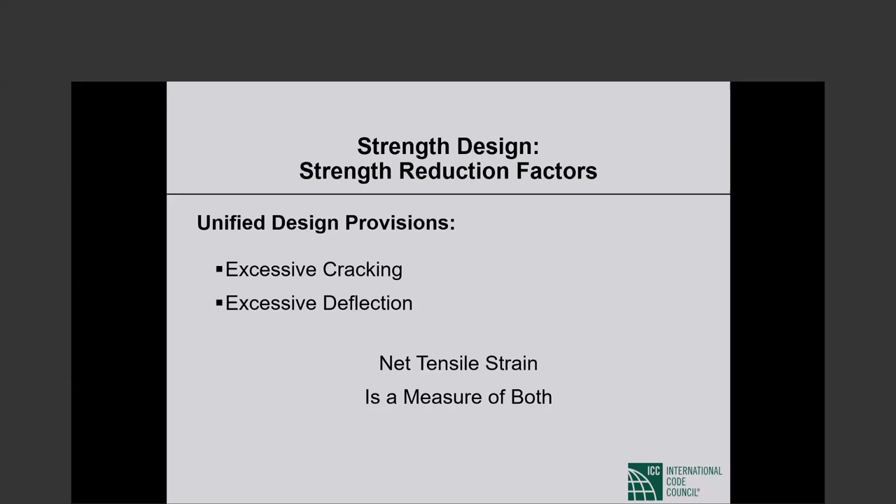Cracking and deflection. Both are related. When concrete deflects, it cracks, and when it cracks, the cracking causes the deflection. The net tensile strain is indicative of both excessive cracking and excessive deflection. This is why he thought it was a suitable quantity to anchor the whole thing on.

Now, in these unified design provisions, we talk about net tensile strain, and then we talk about compression controlled strain limit, the net tensile strain at balanced strain condition. Okay, so balanced strain condition means the reinforcement yields at precisely the same moment that concrete compression fiber reaches a strain of 0.003.

So the compression control strain limit is basically the yield strain of the reinforcement. Compression control strain limit is the net tensile strain at balanced strain conditions. Balanced strain conditions mean the steel, the extreme tension steel, yields at the same instance that the extreme compression fiber reaches a strain of 0.003.

Then we talk about compression control and tension control sections. We have talked about net tensile strain and compression controlled strain limit. Now we are talking about compression control section, and next you will see tension control section.

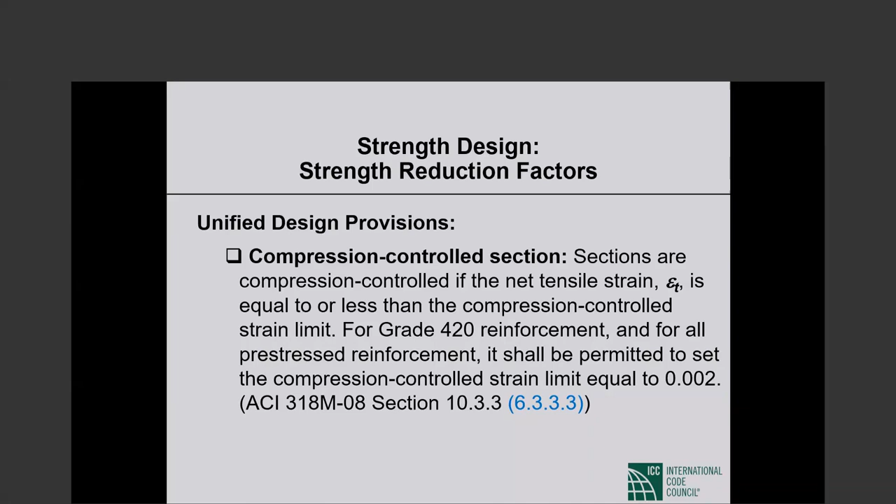For grade 420 reinforcement, that's grade 60 in our case, and for all pre-stressed reinforcement, it shall be permitted to set the compression control strain limit equal to 0.002, the yield strain of grade 60 reinforcement. So when we talk about compression control strain limit, that limit is typically 0.002 if we are dealing with grade 60 reinforcement. That is changing these days, but for all practical purposes, in most applications, the compression control strain limit is 0.002, and a compression control section is a section where epsilon sub t, the net tensile strain, is less than or equal to 0.002.

Tension controlled section. Sections are tension controlled if the net tensile strain is equal to or larger than 0.005. So 0.002 and less is compression controlled, 0.005 or more is tension controlled. Epsilon sub t is greater than or equal to 0.005.

So there are compression control sections, tension control sections, then there are transition sections. Compression control sections, net tensile strain 0.002 or less. Tension control sections, net tensile strain 0.005 or more. Transition sections are sections where epsilon sub t is between 0.002 and 0.005, as simple as that.

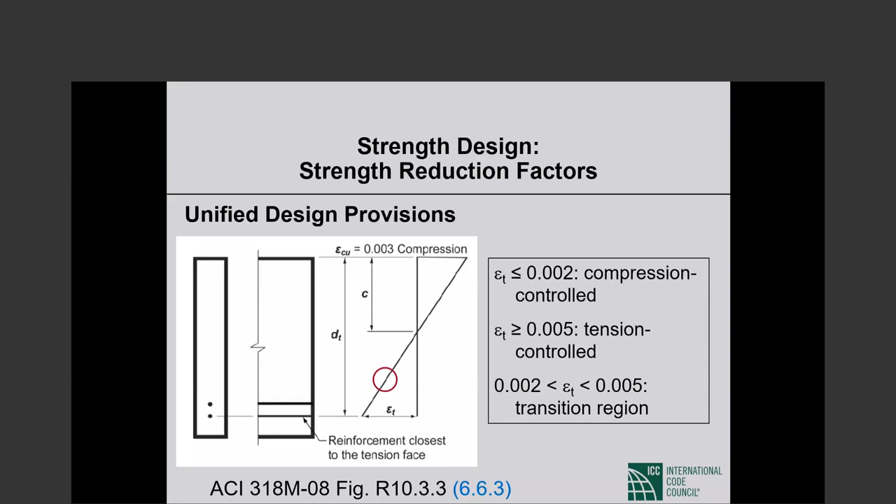So in picture, you see epsilon sub t defined just as before, the strain in the extreme tension reinforcement corresponding to a strain of 0.003 in the extreme compression fiber of the concrete. If epsilon sub t is less than or equal to 0.002, we have a compression control section. If epsilon sub t is larger than or equal to 0.005, we have a tension control section. In between, we have a transition section.

Okay, now the phi factors. Tension control sections, phi is 0.9. Notice we don't say phi of 0.9 for flexure or for beams, it is for tension control sections, 0.9. If it is a compression control section, spirally reinforced member, 0.75. If it is not spirally reinforced, the phi is 0.65. Notice again, we don't say phi of 0.75 for columns, it's compression control sections that are spirally reinforced.

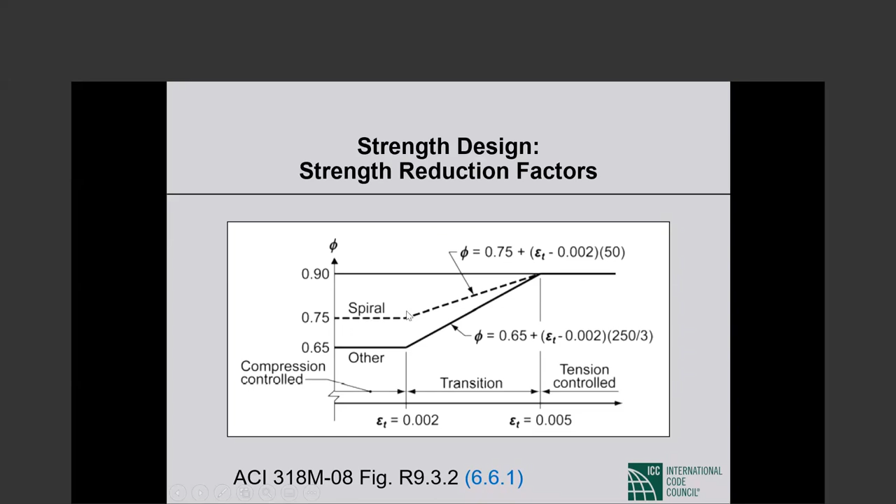In this text is better shown by this picture. So for tension control sections, epsilon sub t of 0.005 or more, phi is 0.9. For compression control sections, epsilon sub t of 0.002 or less, phi is 0.65 or 0.75. In between, for transition sections, we go on a straight line, phi is interpolated linearly between the lower value and the higher value, 0.65 and 0.9 or 0.75 and 0.9, as simple as that. Linear interpolation between the lower value and the higher value.

Next is something that is in BNBC, not in ACI 318. It shall be permitted for compression control sections, the following optional, more conservative alternative values of strength reduction factor phi, where less controlled construction environment justifies such selection according to engineering judgment of the designer. Spirally reinforced, you use 0.7 instead of 0.75, and non-spirally reinforced 0.6 rather than 0.65.

I think this is an unnecessary provision because you can always go lower than the code. As I emphasized the very first time we met, code sets minimum requirements, you can always go above the code. So when the code says phi of 0.75, you can always use a lower phi factor as the designer. The code doesn't have to give you specific permission.

So why this lower phi value for compression control sections? Compression control sections, such as columns, are assigned lower phi factors than tension control sections such as beams because compression control sections generally have less ductility. Ductility is the ability to keep on carrying loads as you deform. Compression control sections are more sensitive to variation in concrete strength. That is absolutely true. A beam is governed in its behavior by the reinforcing steel, the concrete hardly plays a role. As the compression increases, the concrete plays more and more of a role.

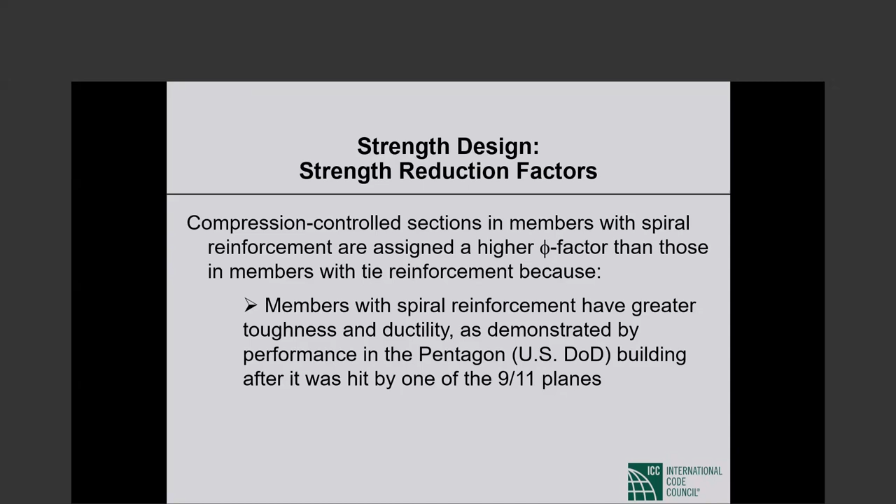And this was amply demonstrated when one of the 9/11 planes hit the Pentagon in 2001. Anyhow, you know this, the spirally reinforced column is more ductile, more deformable than a tied column, and this is why it deserves a higher phi factor.

The other phi factors, shear and torsion 0.75, bearing on concrete, post-tension anchorage zones, strut and tie models, which, yeah, anyway.

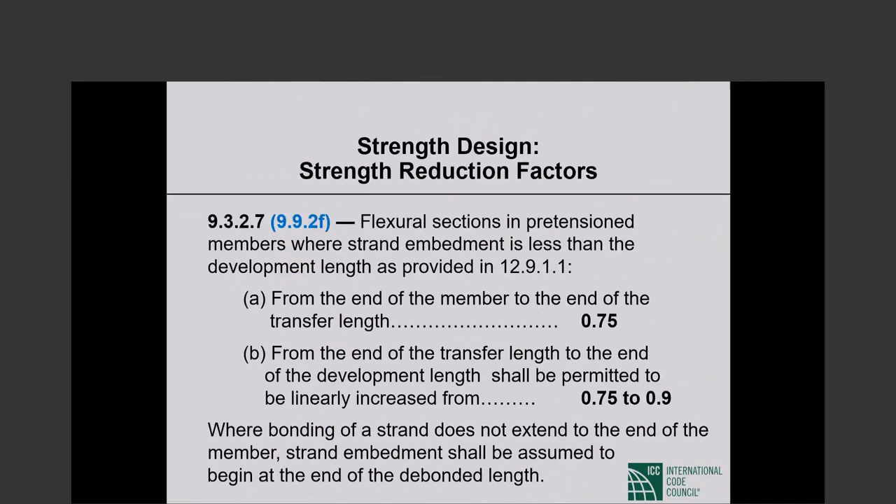It's approaching 10 o'clock, so I am not sure I want to go into this now.

So this is P for pre-stress member. I will skip these two slides. If you have any interest, there's a question, I'll come back. I don't have any problem, this is just to conserve a little time.

Safety margin is provided by a reduction in member strength by the phi factor, and increase in the imposed loads by the load factor. We have both. So safety margin is the load factor divided by the strength reduction factor.

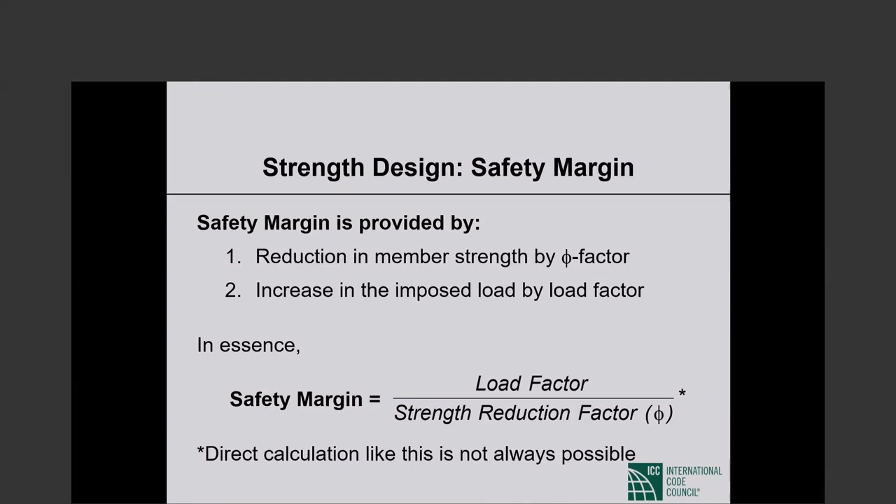Direct calculation like this is not always possible. Actually, it is seldom possible, but some of the time you can do that. So this is an example: design of a beam for flexural moment from dead load. That kind of simple case, you can do this kind of figuring.

So M sub u has to be less than or equal to phi times M sub n. M sub u is 1.4 times the bending moment caused by dead loads. ASCE 7 tells you, BNBC tells you that 1.4 is the load factor if only dead loads are acting on your structure. Phi is 0.9 for flexure. So the safety margin in this case is 1.4 divided by 0.9, which is 1.56.

Load factors and strength reduction factors are provided after considering probability of actual imposed loads exceeding and member strengths falling short of the respective design values, and severity of failure if the above does happen.

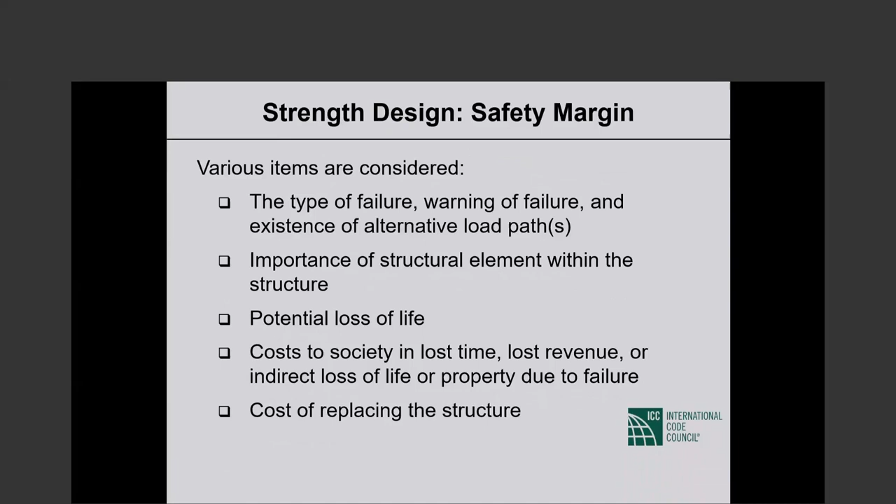There was pioneering work before we finalized the strength reduction factors, and the load factors come from ASCE 7, but even then ACI 318 used to modify them. But before we settled on the strength design that you basically find in ACI 318, or has been in ACI 318 since let's say 1971 when it settled down, it was based on pioneering work by Jim MacGregor.

In this paper, he says something I would like to throw in, then probably it's better to move on. The ACI design requirements are based on an underlying assumption that the probability of understrength members is roughly 1 in 100, one member in 100, and the probability of overload is roughly 1 in 1,000. The probability of overload on an understrength member or structure is 1 in 100,000.

Load factors were derived to achieve this probability of overload, based on this probability of overload, 1 in 1,000 members being overloaded. Based on the phi factor, based on values of concrete and steel strength corresponding to a probability of understrength of 1 in 100, the strengths of a number of typical sections were computed. The ratio of the strength based on these values to the strength based on nominal strengths of a member of typical section - anyway, I'm not doing the best job of reading, I would let you read it.

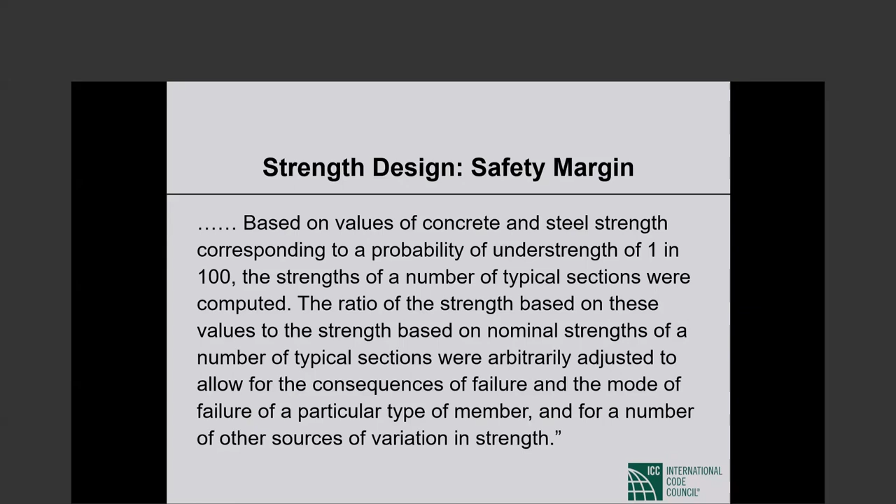So Jim MacGregor in that pioneering paper gives you the basis for the load factors and the phi factors used in ACI 318. The load factors are basically adopted from ASCE 7, which are also adopted by the IBC, International Building Code.

You do not have multiple sources. You have the load combinations in BNBC, and I will go there. So a structural member is required to be designed for a number of combinations of these effects of various factored loads. Remember: loads, load effects, factored load effects, and then combinations of factored load effects, which is our required strength. I'll do it again.

We have service loads, service load effects, factored load effects, and then combinations of factored load effects, which is the required strength. Strength designed load combinations are provided.

Notice I did not even mention ACI 318. In the US, because the load combinations are given in the IBC, those are the load combinations you must use in design. Those are based on ASCE 7, but when a code and a standard cover the same topic, you go with the code, not the standard. In your case, that problem doesn't arise. Your load combinations are in BNBC 2020 section 2.7.3. You have one place to go.

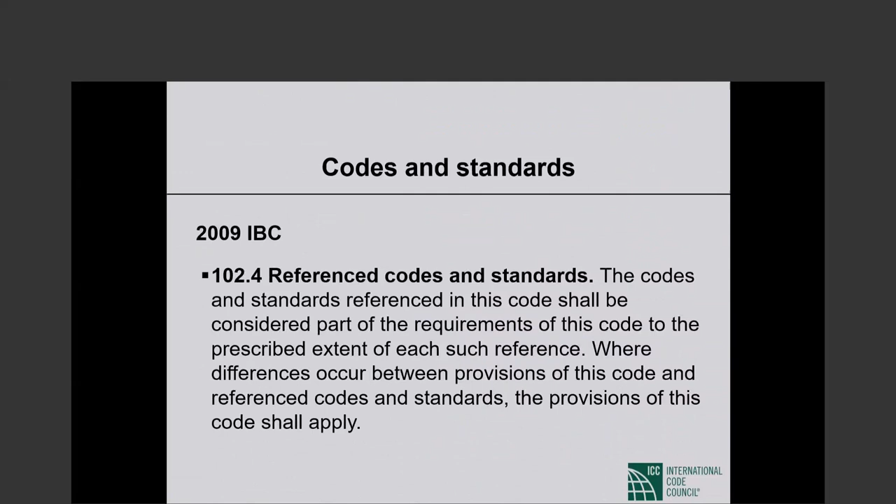Here I'm telling you that the code governs, not the standard. So these are the design load combinations of 2009 IBC and BNBC 2020. Same load combinations.

D is the effect of dead load. F is the effect of fluid pressure. T is typically called temperature effect, although that is a misnomer. So D is dead load effect, F is fluid load effect, T is effect of self-straining forces. That's a much better way of saying it. T stands for temperature, but it is the effect of restrained volume changes. That's what it is.

L, live load effect. H, effect of lateral earth pressure, very important. L sub R, roof live load effect. R, rain load effect. W, wind load effect. E, earthquake effect. So F is fluid load effect, T is effect of restrained volume change, H is effect of lateral earth pressure, and so forth.

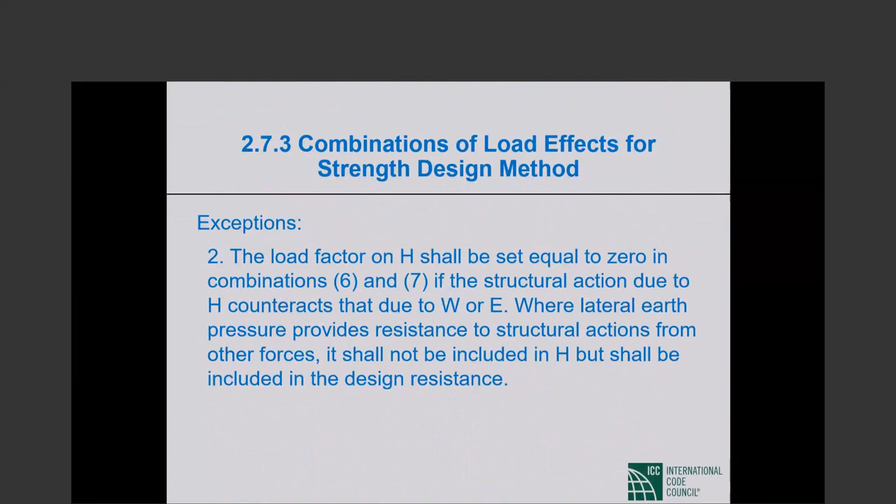Exception 3 talks about directionality of wind, and I will come to that in just a second. Okay, directionality is coming right up.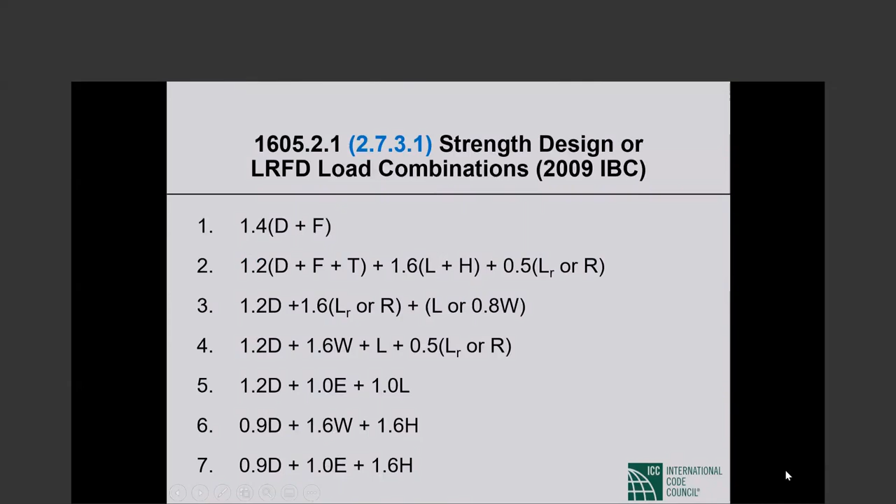Earthquake loads computed in accordance with 2009 IBC or BNBC 2020 are already a strength level load. This is why the load factor on E, earthquake effect, is 1.0 in the load combinations. If you noticed, load factor on W, wind, is 1.6, load factor on E is 1.0. The load factor on E is 1.0 because E is already at a strength level.

Okay, this is BNBC, not ACI 318. When a structure is located in a flood zone or tidal surge zone, the following load combination shall be considered. In coastal zones vulnerable to tidal surges, 1.6W shall be replaced by 1.6W plus 2.0 F sub A, where F sub A is the effect of flood load, calculated according to BNBC 2020. In non-coastal zones, 1.6W shall be replaced by 0.8W plus 1.0 F sub A. These are BNBC provisions important for you to keep in mind.

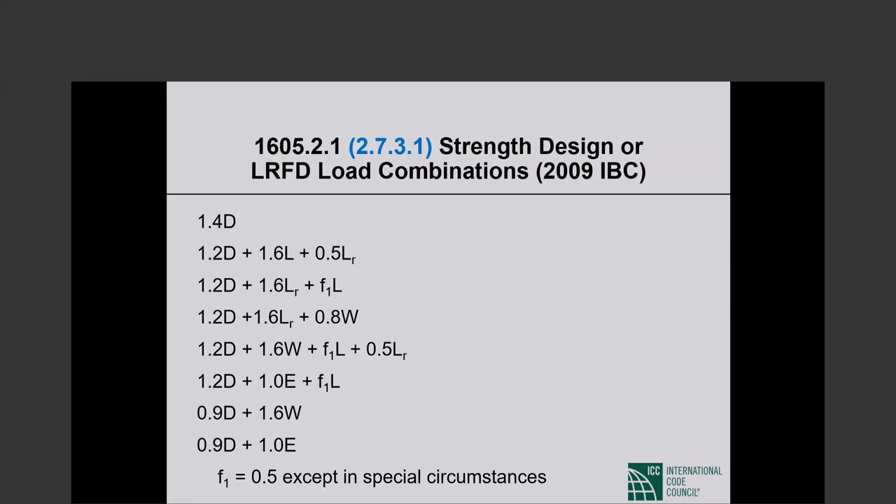For many members, the only loads considered are dead, live, wind, and earthquake. The others go away, and the load combinations get reduced to what you see in this picture. The F sub 1 load factor on the live load is an IBC creation. F sub 1 can be 0.5 or 1.0. It is 0.5 unless you are designing a parking structure, a place of public assembly, or an area supporting more than 100 pounds per square foot of live load.

In addition to the possible variability of the specified loads, values of load factors are also assigned based on the probability of simultaneous occurrence of different load types. For example, the load factor on dead load alone is 1.4, which is higher than the load factor on dead load of 1.2 when other loads such as live load, wind, etc. are also present.

Now let us talk about the directionality of wind. You have seen that the wind load factor is 1.6. It used to be 1.3 earlier; it changed to 1.6. This will be the subject in one of our seminars after we finish concrete, when I talk about wind.

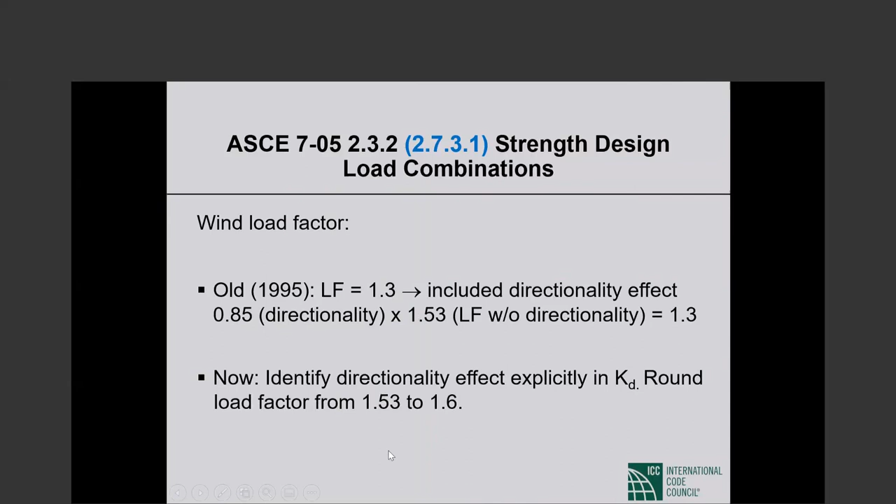But at one point, in ASCE 7-1998, ASCE introduced a separate directionality factor K sub D in the expression for wind pressure. So the wind load factor had to be increased by the same directionality factor. The new load factor needed to be 1.3 divided by 0.85, which gives 1.53. The 1.53, instead of being rounded down to 1.5, was rounded up to 1.6. So that's the history behind 1.6.

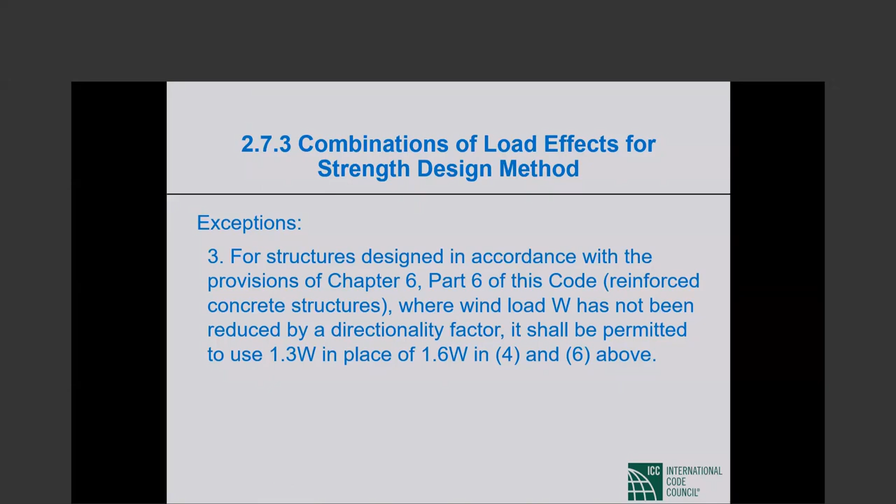And that brings us to exception number 3, which I skipped. Exception 3 says: for structures designed in accordance with the relevant provisions, where wind load has not been reduced by a directionality factor, it shall be permitted to use 1.3W in place of 1.6W. If wind does not include directionality, your wind load factor should be 1.3. If wind includes directionality, which it normally would if you calculate wind by BNBC 2020, then the proper load factor on wind is 1.6.

Now the seismic load combinations: additive, 1.2 dead, 1.0 live, which would typically be 0.5 live plus 1.0 E, and the counteractive, 0.9 dead plus 1.0 E.

Let me do it slightly differently than how the slides are. Let me do it the way it's in the IBC, and then I'll take you back to BNBC.

In seismic design, we start with the design base shear V. There are seismic modules coming up. We distribute the V along the height of the structure in the manner prescribed by the code, giving us lateral forces at the various floor levels. We analyze our structure elastically under those floor level forces. The IBC notation for which is capital F sub X, X for floor level X. This analysis gives us bending moments, shear forces, and axial forces at the various critical sections of structural members.

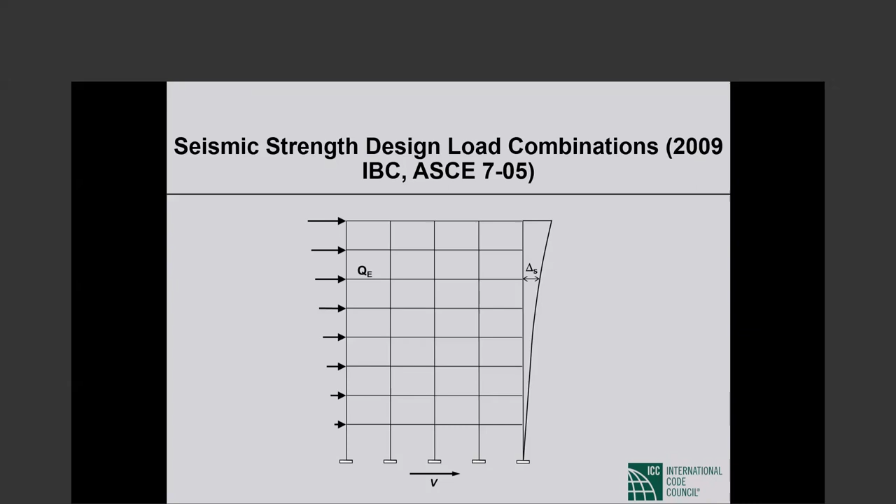The generic notation for those internal forces in the IBC is Q sub E. That's the bending moment at a beam section caused by the horizontal earthquake forces. Q sub E is also shear at a beam section caused by the horizontal earthquake forces, and Q sub E is also axial force in a column section caused by the horizontal earthquake forces.

In the additive seismic load combination, 1.2 dead, 0.5 live, 1.0 E, the earthquake effect E is taken as the horizontal earthquake effect Q sub E amplified by a redundancy factor rho, and added to that is a vertical earthquake effect, taken as 0.2 S sub ds, the short period design spectral acceleration, times the design dead load.

So the earthquake effect E is the combination of horizontal earthquake effect and vertical earthquake effect. The horizontal earthquake effect is Q sub E multiplied by the redundancy factor rho, and the vertical earthquake effect is 0.2 times S sub ds, which will be described in great detail in our seismic modules, times the design dead load.

When we collect terms, what we get is 1.2 plus 0.2 S sub ds, times D, plus rho times Q sub E, plus 0.5 L. So in this additive seismic load combination, we have increased the dead load factor from 1.2 to 1.2 plus 0.2 S sub ds by considering vertically downward earthquake ground motion. If S sub ds equals 1, the dead load factor is 1.4 instead of 1.2 in consideration of vertically downward earthquake effect.

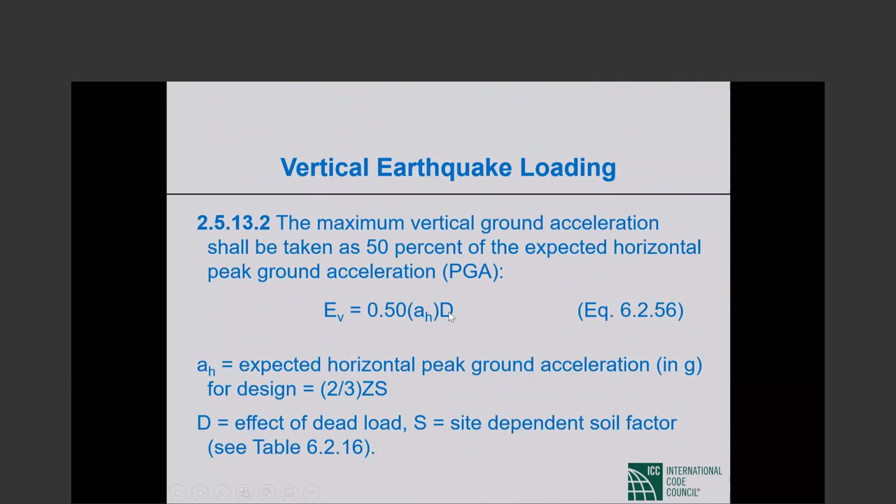BNBC exactly mirrors what is in the IBC, except that the vertical acceleration term is 0.5 times A sub H times D, and I'll explain that this is exactly equivalent to 0.2 S sub ds times D when I do my earthquake module with you. So what I described for the IBC is exactly the same in the BNBC. Earthquake effect is a combination of horizontal earthquake effect and vertical earthquake effect. The horizontal earthquake effect is rho times the effect of the code prescribed seismic forces, and the vertical earthquake effect is 0.2 S sub ds times D.

Now I'm definitely beginning to run late, but I don't have a lot more to cover. Unified Design Provisions were first introduced in 318-95, moved to the main body in 2002. Since then, this is the way to design concrete, the Unified Design Provisions.

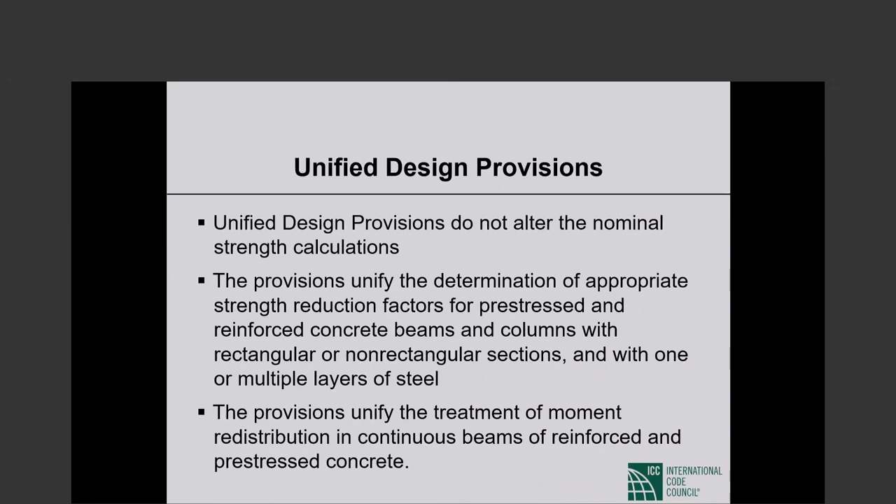318-02 is when unified design came into the main body of ACI 318. The edition before that was ACI 318-99. In the slides I'm skipping, I go back to 318-99 to show what the problems were, how we failed to treat reinforced concrete and pre-stressed concrete beams and columns the same way—which was, in Bob Mast's mind, the justification for unified design. So that's what I'm skipping.

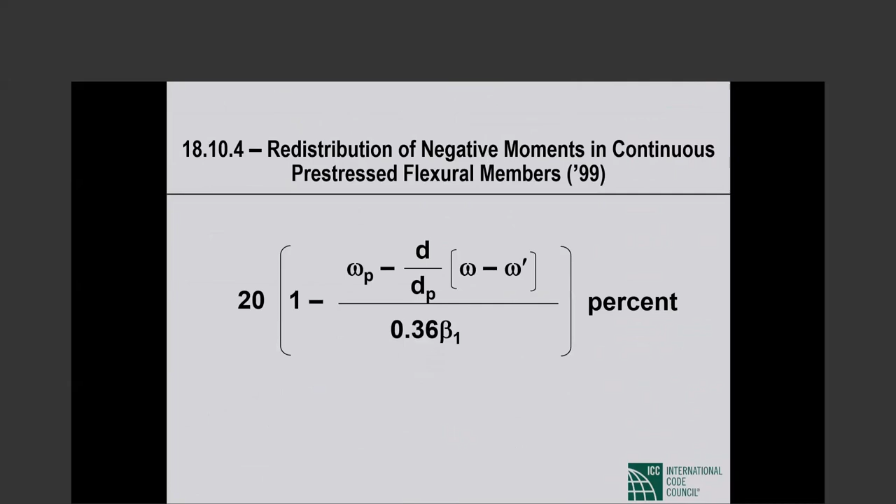For you, ACI 318-99 doesn't make any difference because your basis is 318-08, much later. So I keep those slides in, but there are no consequences. Two things are important.

Prior to switching to unified design, we have tension control sections with epsilon sub t of 0.005 or more, compression control sections with epsilon sub t of 0.002 or less, and transition sections. We used to have a maximum limit on tension reinforcement, which was 3/4 of rho balanced. The balanced reinforcement ratio is the ratio that leads to yielding of the extreme tension reinforcement at precisely the same moment that the extreme compression fiber concrete reaches a strain of 0.003.

So in a flexural member, with phi times P sub n not exceeding 1/10 f sub c prime A sub g—let's say in a flexural member, that's what this describes—we could not place any more tension reinforcement than 3/4 of rho balanced. There was a pre-stressed concrete counterpart that I will not even get to.

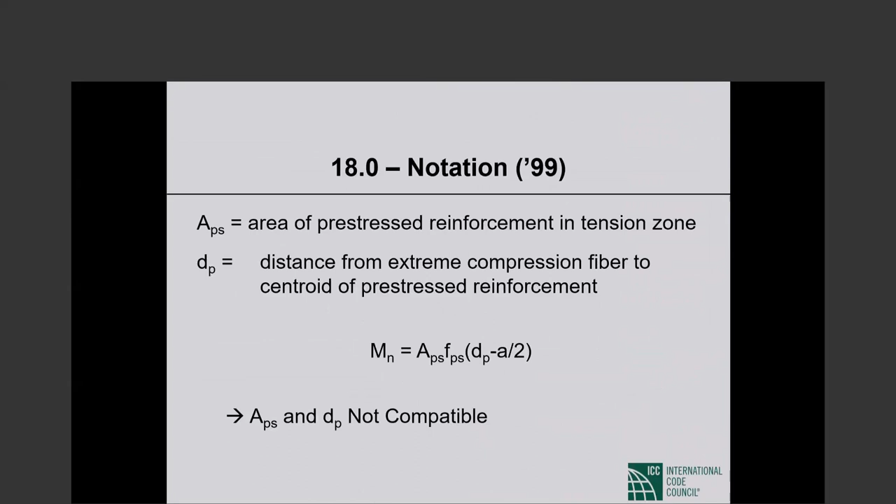So keep that in mind. Now under unified design—the maximum tension reinforcement ratio was 3/4 of rho balanced, and there were provisions for moment redistribution which were quite different between pre-stressed concrete and reinforced concrete. Unified design modified both, and this is what I'm coming to, what is of interest to you.

This is what is in 318-08, and this is what is in BNBC 2020. So we are now talking about redistribution of bending moments, which applies equally to both non-pre-stressed and pre-stressed sections. The moment redistribution is now based on net tensile strain, epsilon sub t.

The percent redistribution allowed is 1000 times epsilon sub t. It doesn't matter—reinforced or pre-stressed—the moment redistribution you're allowed to take is no more than 1000 epsilon sub t. You cannot take any moment redistribution unless your epsilon sub t is at least 0.0075. That's what we say here.

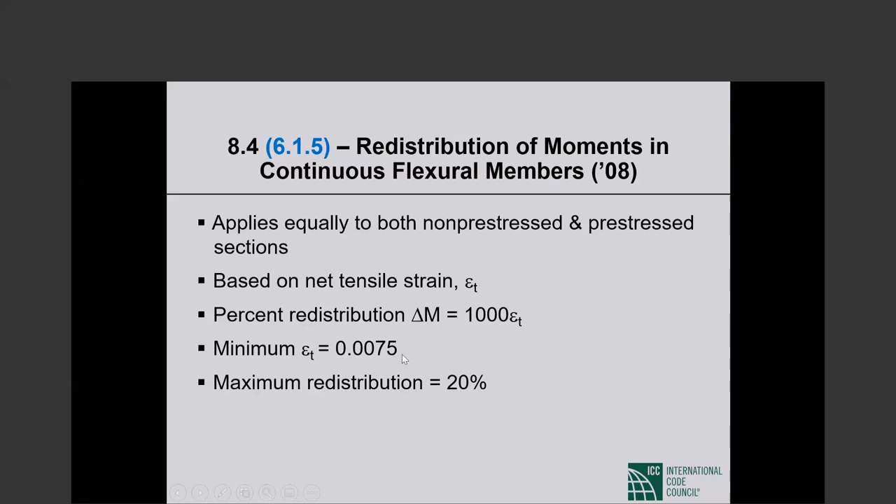Maximum redistribution you can take, irrespective of the value of epsilon sub t, is 20%. So the redistribution allowed is 1000 epsilon sub t. You cannot take any redistribution unless epsilon sub t is at least 0.0075, and the maximum you can take is 20%. Now, moment redistribution—you decrease the negative moment by delta m, in which case the positive moments will increase.

But unlike in older times, we are also allowed to decrease the positive moment by the same delta sub m, in which case we'll end up with more negative moment. It depends on the situation you are facing. If you want to decrease the negative moment, you take redistribution on the negative moment. If you want to decrease the span moment, you decrease the span moment and the negative moment will go up. Both are allowed.

Moment redistribution may not be used for slab systems designed by the direct design method. There are two ways of designing two-way slabs: direct design method and equivalent frame method. If you're using the direct design method, then there is no moment redistribution.

So now, moment redistribution requires net tensile strain of at least 0.0075. As soon as it is 0.0075, we can take 7.5% moment redistribution, 1000 times 0.0075. We can go up to 20% for a net tensile strain of 0.02, and it remains there—we cannot go any higher.

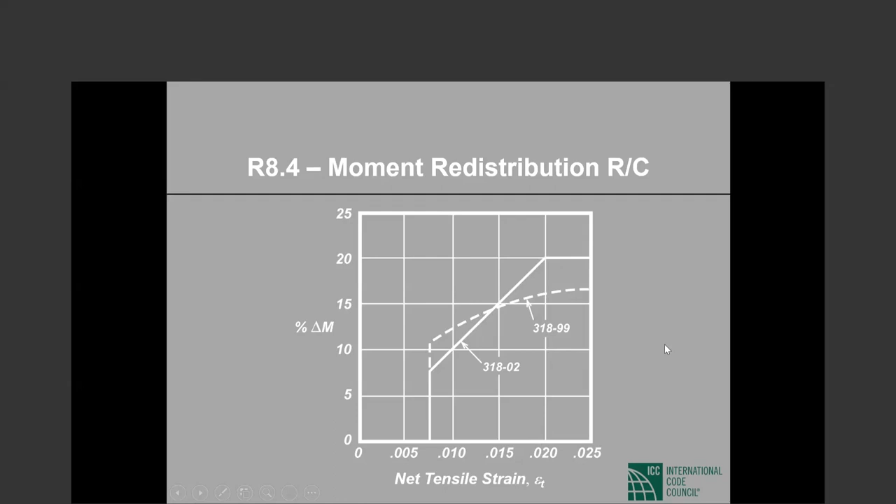This used to be ACI 318-99 moment redistribution for reinforced as opposed to pre-stressed beams. For pre-stressed beams, now there is no difference—the moment redistribution is, as I described, 7.5% at 0.0075, going up to 20% at 0.02. But the moment redistribution of 318-99 was as shown here. So that is moment redistribution.

Now the maximum reinforcement—this is the last topic. Remember, we could not go beyond 3/4 of rho balanced.

Now we say for flexural members with P sub U, required axial load less than 1/10 F sub C prime A sub G, required axial strength less than 1/10 F sub C prime A sub G, net tensile strain shall not be any less than 0.004.

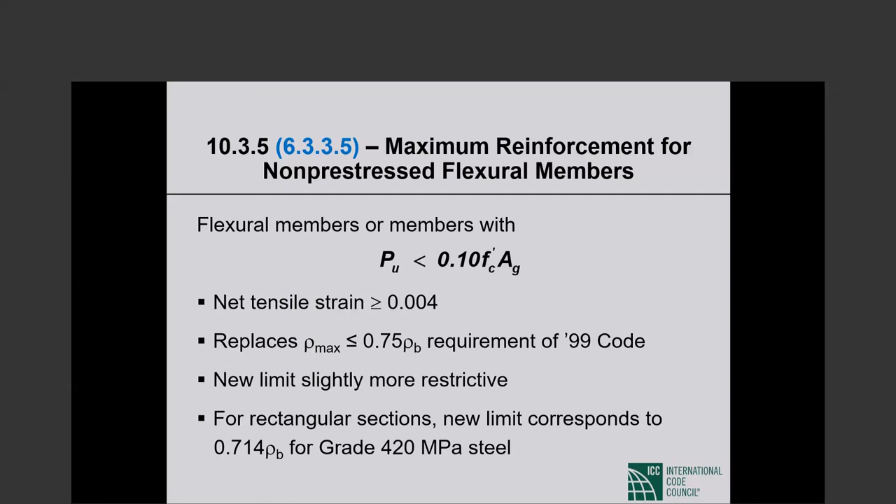Tension control sections start at 0.005. We are not saying all flexural members have to be tension controlled, but we are saying that the net tensile strain cannot be any less than 0.004. This is extremely important. This takes the place of rho maximum shall not exceed 3/4 of rho balanced, which we used to require from the beginning of strength design. The new limit is slightly more restrictive. For rectangular sections, the new limit corresponds to 0.714 rho balance rather than 75% of rho balance for grade 420 reinforcement.

Okay, and that's about as far as I need to go. Pre-stressed, I will not worry about. So it's not too bad. 10:30 was the target, it's 10:34 or so, I have time for questions.

So the first half was the material provisions. The second half, strength design, and then I went to the unified design that is currently in the code, starting with 318-02. That definitely is what you have in BNBC 2020. And the last two things I talked about: moment redistribution, I don't know if it's terribly important because it's becoming increasingly uncommon to use moment redistribution, but the net tensile strain cannot be any less than 0.004 is vitally important in the strength design that we do these days.

Now, starting with ACI 318-19, we have said all beams shall be tension controlled, but for you that is in the future, and probably in the far future, so I will not go there. For a long time to come, your practice will have to be: net tensile strain shall not be any lower than 0.004. Okay, thank you very much.